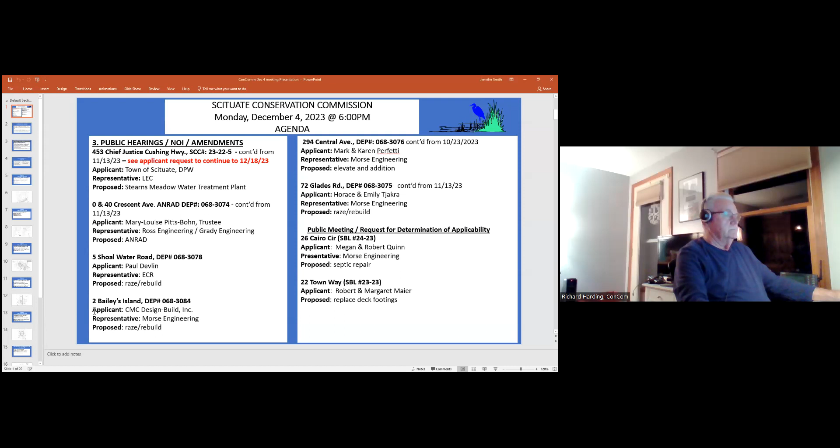Good, Frank. Where'd you go, Frank? I'm here. Oh, okay, all right, you're good to go.

So, do we have everybody in, Jen? 1, 2, 3, yeah we do. We have 5. Oh, unless Jen, I haven't seen Jen Foley. She's not here tonight. Okay. And Andrew isn't, right? Correct. Yeah, all right.

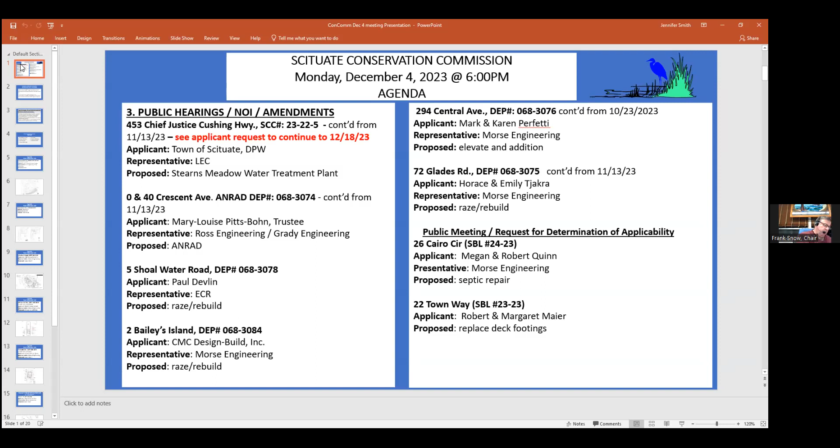Excuse me, so the first one we have is 453 Chief Justice Cushing Highway. That was continued. We have someone from LEC on. We have a request to continue that to December 18th, Frank. I'll make a motion to that effect. That's a motion, I'll second it. Second from Penny. All in favor? Doug, yes. Brendan, yes. Frank, yes, thank you.

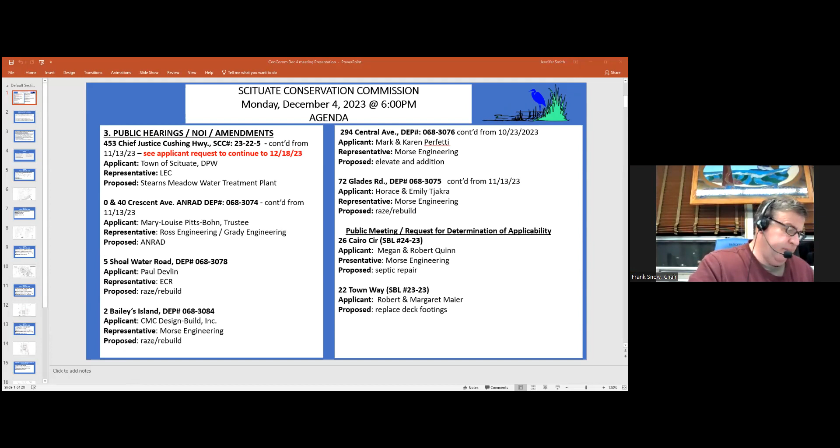It goes somewhere else. Okay, 0 and 40 Crescent Ave ANRAD. And we have Ross Engineering, Grady Engineering, and I think Attorney DeLisi. Hi, members of the board. Can you hear me? Jeff DeLisi. Yes, Jeff. Great. Hi, Jeff. I also unmuted iPad, which I think is Paul Mirabito. Yeah, this is Paul. Hey, thanks, Paul. Good evening. Good evening.

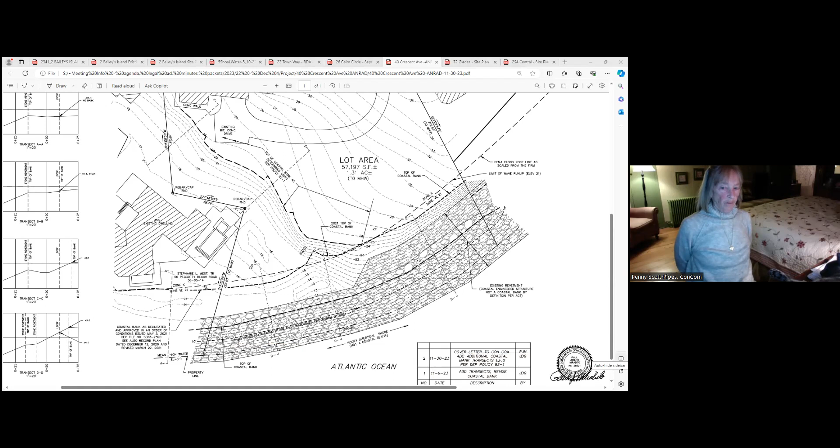I'll do a quick little intro just to let you guys know what we're thinking, then I'll turn it over to Paul. Sounds good. This property is out on Third Cliff at the intersection, basically where Peggotty Beach Road meets Crescent Avenue. The client has obtained zoning relief and a planning board A&R plan was filed to create a lot that has less than 100 feet of frontage and more than 50 feet of frontage. The issue is what we're trying to do now is to delineate the resource area.

So that any potential buyer could make plans to meet the Act, essentially, in any plans that the potential buyer might have. And so the problem here is, and I think I see that Deb Keller is on from Merrill Engineering, the issue that we're all kind of scratching our heads with is that the DEP's CMR defines coastal bank, but does not define top of coastal bank. And so the question is where do you put it?

On this particular property, you can see on Grady Engineering's plan that there's a significant amount of a coastal engineering structure, a revetment, a stone revetment, that is basically what everyone knows as the seawall. And that is essentially taken the place as the coastal bank. But because there is no definition of top of coastal bank, the CZM manual, which is not a part of the CMR, requires or provides guidance that you would follow a slope, which I think is contour number 23, in determining where that coastal bank is.

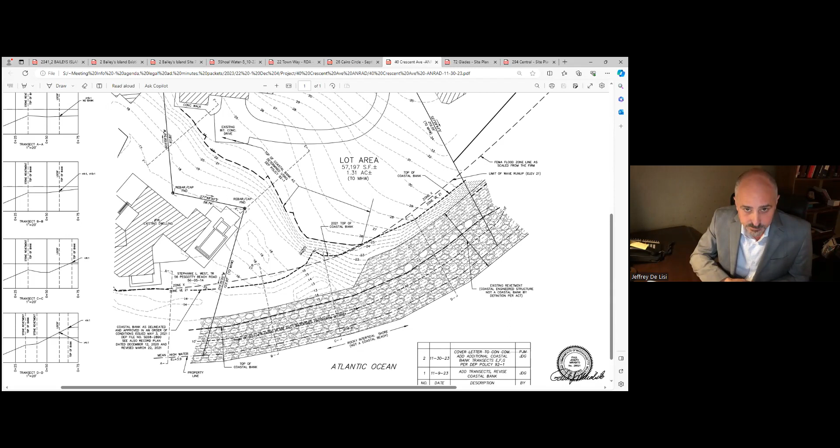Well, it seems like if that's the case, then that decision would probably be better made at the state level, Frank, since this is not really a local matter, in my opinion, because you're talking about state resource areas.

But you have to make a determination before it even gets there, right? Yeah. Right, so the plan would be inaccurate, is what I would say. Well, I guess I'm a little confused when you say the plan's inaccurate. I mean, we just heard from both the engineer and from Deb, from peer review, that they've looked at this.

I'm going to jump in just a little bit—I'll get it back to members, but I just want to get it a little tuned in. So if we look at that, was it example 5? Yes, figure 5.

In reviewing that, you see there's just a thought that coastal bank could be at elevation 21, right? But then these things have always puzzled me because I've heard so many different conflicting pieces. You would kind of look at this and logic would tell you that top of coastal bank would be more at the top of the revetment, or where that slope changes and that VE zone kicks in.

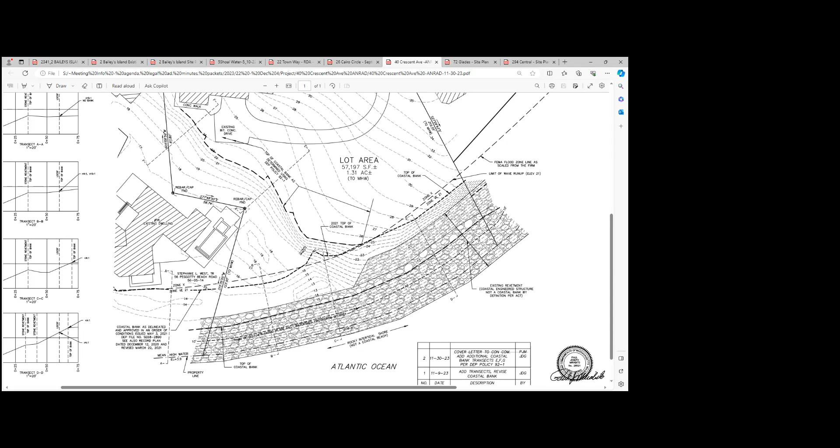Frank, if I can add to something Jeff brought up—if you look at the line that was approved under the order of conditions for number 56, I believe, if they're using the same thinking I'm using, as well as what Jeff opined about where the top of the coastal bank should be, which is on the revetment, that line of 56 is just below the velocity zone line that is scaled from the FEMA map, and that's what was approved by the commission.

If you look at the land behind that line, it actually drops down to like elevation 18 and 19, which is lower than 21. But again, the commission took the top of the coastal bank where it's shown on my plan. What I did was copy it, and I've noted that on the plan as well.

That coastal bank line was also peer reviewed by Bob Gray from Sabatia, and Stan Humphries also chimed in on it for the applicant. Okay, so again, the other thing I'll point out is in the ANRAD packet there's an untitled map, which is in color. It's from Google Earth, and it shows the revetment, and the lower portion of it is a darker color, which I believe is the mean high water line, which is also the property line of the lot.

That's pretty much where the water level is on a day-to-day basis. But again, FEMA's mapped it for storm purposes to be up at elevation 21. I believe the revetment was built in the location, both horizontally and vertically, to protect the base of that cliff so it wouldn't fall into the ocean. And that's why they've picked elevation 21. The top of the revetment is actually up around elevation 22 or 23.

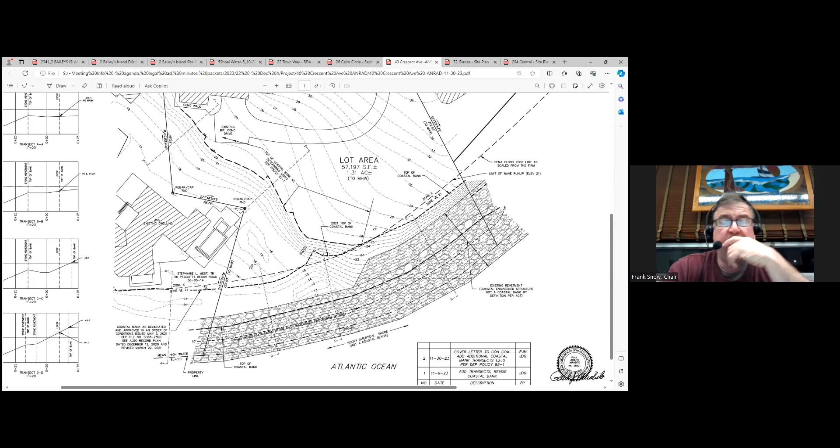And so that's where I think we're now coming to play and looking at it and going, per the policy, there looks to be a second coastal bank, which is more landward than the one that was previously approved. And we've certainly gotten into that before as well.

I'm going to dish this out to members first, and then it will circle around again. And I just think the best person to field that one is Doug. Lucky Doug. He's jumping at it, Frank. Yeah, he's all excited. Well, these do get complicated.

They're always very troubling when you're following contours and they jump up the slope because of the change in slope, and you get this really jagged, funky looking flood zone, and you're like, water doesn't really behave that way. But when you're technically following the determination that's spelled out, you do end up with that sometimes. Which always seems like, well, there should be some better way to determine that, but we've seen a lot of those submitted to the commission.

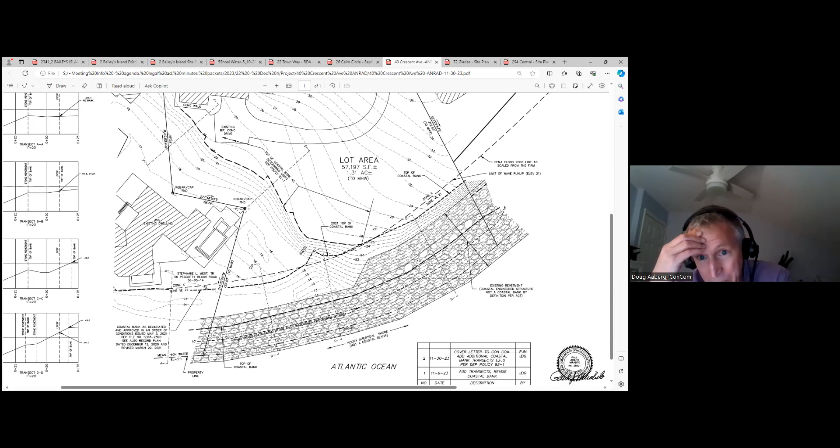Where you have a line that's going along and it looks continuous and it makes sense, like this following the top of the embankment, that all makes sense. And then all of a sudden, when the slopes change, it diverts and goes somewhere else.

I'm going to be looking for a way in. I mean, I can see why this plan, I guess, is accurate because it shows two different flood zones. They would like to hold the one lower, for obvious reasons - it's far less restrictive if you hold that upper one. It's too bad that in 56, that one was submitted without, like Paul suggested, the other topography on there. So if you look at that in an isolated view, it makes sense.

And it's following what the FEMA map shows as a flood zone. But if you're following the slopes, it moves more inward, and it does seem like a conflicting determination.

But Deb made the statement that she believes there would be wave action up there, for 56. Can we get Deb to just quantify that a little bit, like where you thought that was? Where I'm coming from is going back to - and it really doesn't have to do with the definition of coastal bank, but it's the reading of how to interpret where that limit between the VE zone and the zone X ends up.

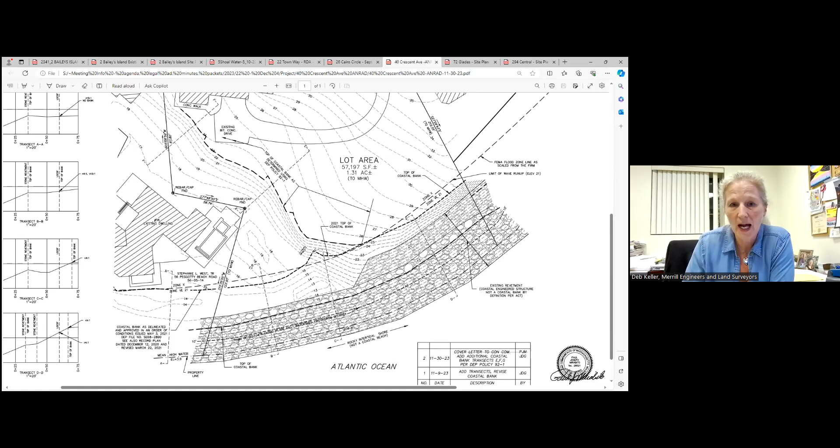You start looking at that slope here, because you're saying I have flooding all the way up in between those two homes. It's going to flood out 56 Peggotty Beach. And now I'm looking at the slope and using policy 92-1 to determine where that top of bank is from that flood zone.

That's how I'm sort of looking at it, saying through the DEP policy, it looks to me like a second coastal bank. But I have to agree that the definition of coastal bank makes it hard to coincide the two and really make them work hand in hand.

Thank you. Yeah, the two definitions are at odds, and my point is that the definition of coastal bank is that it has to be the seaward face or the seaward side of any landform other than a coastal dune. And so here you have this structure, which is the landform.

And I understand what Deb is saying, because she's looking at the FEMA line, which is not necessarily adopted as part of the decision on the definition of coastal bank. But I think the commission needs to look at, is this a coastal bank? Not whether this is in the flood zone.

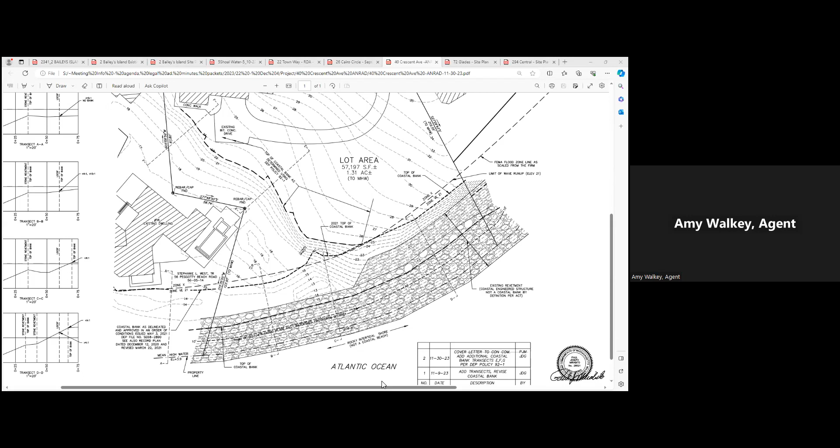It just, is it a coastal bank? Right. Which sounds to me, when we look at things like that, we're following strictly by the language, the policy, and the slope. Yeah, and if that's the case, we have a review consultant who has indicated that it should be up to the top, the upper line there.

Let somebody else. Okay, we'll circle around this, but we can't be at this all night either. Can I ask one more question before I move it on?

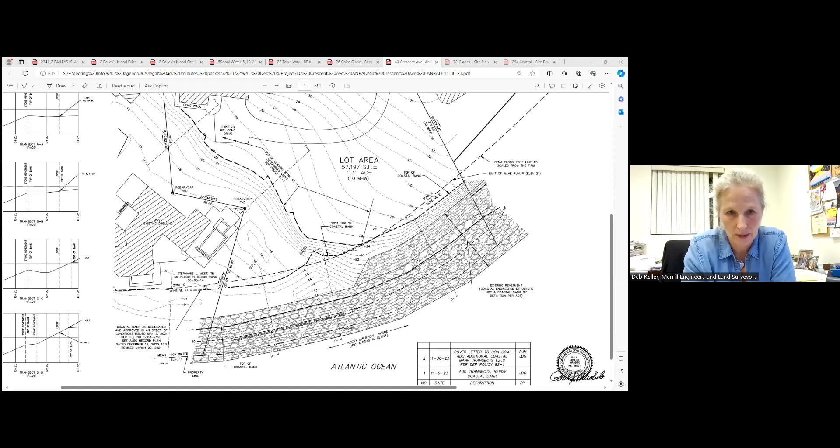Is there a way to designate like a first and second coastal bank when we have multiple ones? I don't know if policy 92-1 signifies that. But I do think you can definitely have multiple coastal banks on a property. That's indicated in both the coastal bank definition as well as the policy. I don't know if they tell you how you're supposed to designate it, but I've seen it as Coastal Bank 1 and Coastal Bank 2, just to indicate on the property that there's more than one coastal bank.

Okay, thank you. Frank, we show one on the revetment on the left side. It says top of coastal bank. The riprap comes up a ways and then it flattens out and then continues to slope up again. It's on the left-hand side, and it says top of coastal bank on the revetment.

Got it, yeah, I see one. And then the other one would be the one that was approved by the commission for number 56. And the third one would be the one that I and Deb laid out last week, which says top of coastal bank is determined by DEP policy 92-1, which does not reference anything about coastal engineering structures. It presupposes that there is none. That's the flaw in using that policy in this circumstance.

Paul, just briefly, on 56 Peggotty Beach Road, where was the line? If you were to draw the line that was established by the commission all the way through this property, would it be the Zone X VE line? Is that it? It's the line we show on the plan as the coastal bank delineated and approved in the order of conditions issued on May 3rd of 2021. That line is shown on our plan. There's a small bump up and then it continues over to the right side of number 40, just below the FEMA flood zone line. And that's what you're asking here.

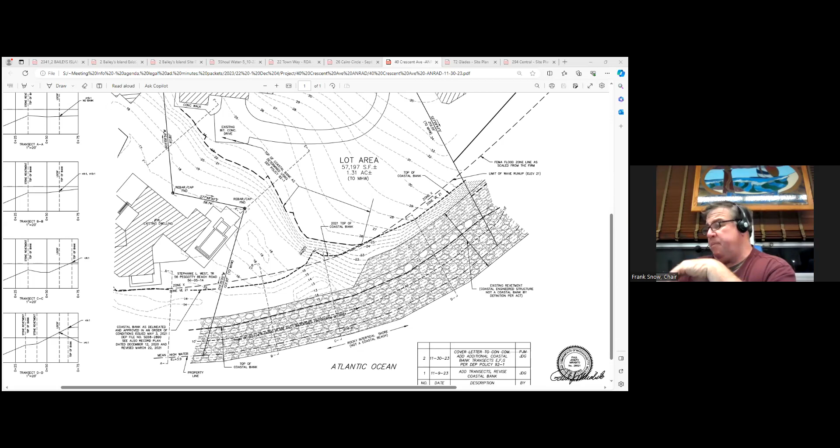Richard, I'm in no man's land. I can understand Penny's concern, and this is certainly not my strong point. I see the inconsistency on the one hand, between

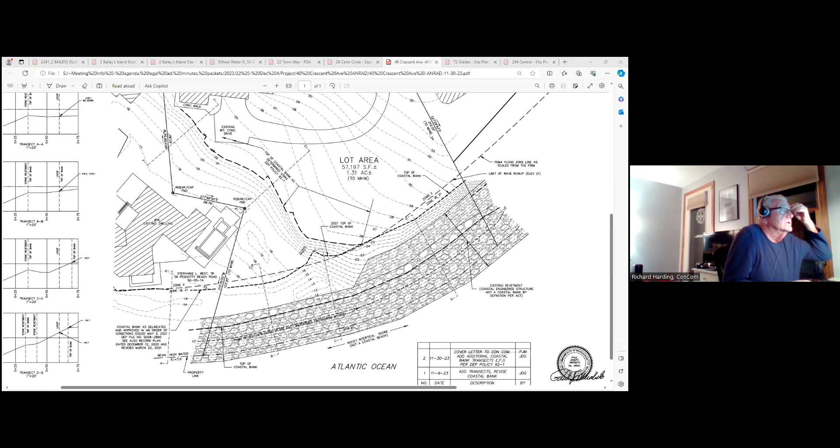the VE 21 on the one hand, it goes across slightly lower between where it comes up to VE 21 and Zone X meet. It just, to me, I wish it was just Zone X and the line went straight up that way. It would be, to me, a little more easy to figure out. I don't know what to say.

I honestly don't. The one thing that keeps striking me is all of these things are set up for a 100-year storm. So if you don't have a storm in 100 years, but then you have two within 200 years, it's just incredibly complicated to me. I'm sorry, I'm not being much help here, except that I do agree there should be some consistency, and I don't see it happening.

Brendan, thank you, Richard. Are you glad you live in the West End? I am. Yeah, I have no coastal bank. Not yet. No coastal bank here yet. But someday.

Yeah, this is very confusing as to which one is the one that should be. I don't have very much more to add than that.

Because, Frank, yes, Penny, my problem is this is an ANRAD. So of course they want as much land as they possibly can for somebody to build on the ocean side here of the Pitts house. So I can understand that, but once we stamp it, it's done, the ANRAD. And I just don't want to make a huge mistake and get in trouble with another project down the road.

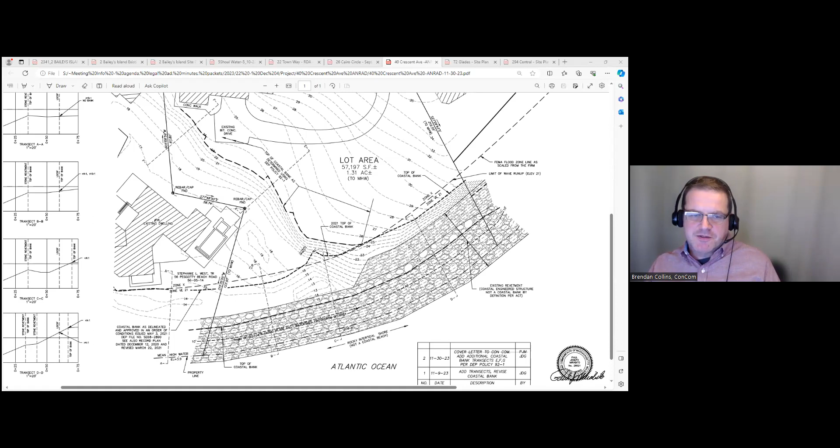I am hesitant to accept this as the fact, just because there's also a top of coastal bank that's part of the revetment, and I haven't found anything in my research that says that engineered structures could be top of coastal bank. It's funny, Brendan, when I first got on, that was like everybody just pegged the top of a structure as coastal bank, and then they revisited all that, and then they've changed it to this type of thing. But

So I guess the question would be, can we accept this plan showing multiple coastal banks? I mean, is one being shown right near the elevation 21, the VE Zone X, right? We have one coastal bank shown there, and then we have another one coming in up on the top of that slope.

Yeah, Amy, if you gave this plan to someone like Greg DeCesar, what would, how would they weigh in?

I think it's a little bit confusing, to say the least.

Well, the plan is drafted in order to make an argument to hold that lower line consistent with the statements of not a coastal bank, rock, in the revetment. So even though it calls out top of coastal bank more than once, there is ambiguity in the plan itself.

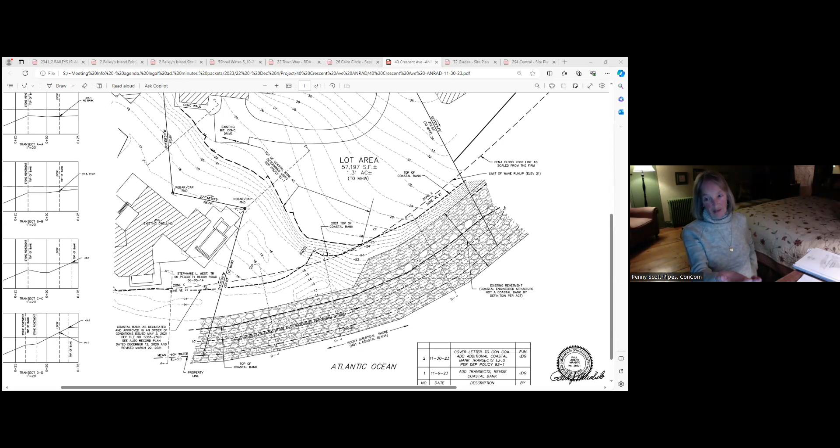Okay, Jeff, what you hear is that in the corner, showing that line at the VE zone, coastal bank is delineated and approved in an order of conditions of May 3rd, '21. Well, why is that not true?

It is true, I'm not saying it isn't. So what we're trying to figure out in this plan is, we're going to say that everything on this is in accordance with the information we have.

So we know that line—did that line actually get accepted all the way up to the other end of this property, or did it? Yes, it did, Frank. On the Pitts property? This is the Pitts property. No, I know this is the Pitts, but my question is this: the line that's shown here, the arrow points to it, and it says that's the coastal bank that was delineated and approved.

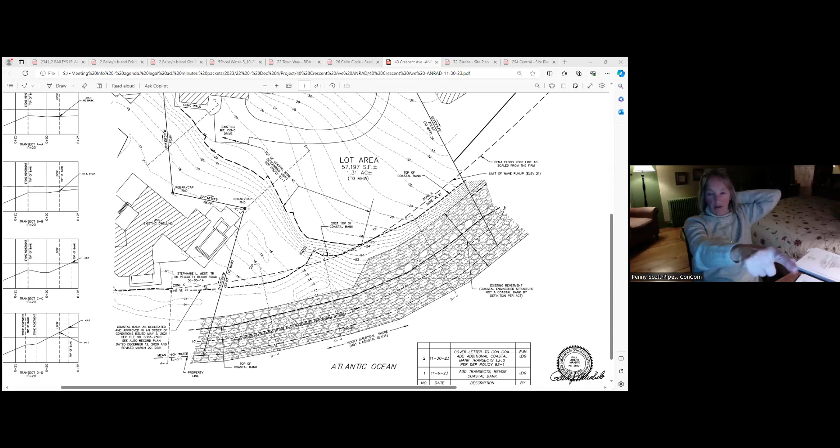And it's pointing to a line there, but on the plan that was approved in '21, did that line actually get drawn along this whole area, this piece of property that we're seeing now? Or did it stop at that property line, or somewhere right around there?

No, it kept going under number 40, because one of the transects that the peer review engineer was asked to do was actually on the land at number 40. I've got the site plan here from Morse. Go ahead, Deb. I'm looking at the Morse plan.

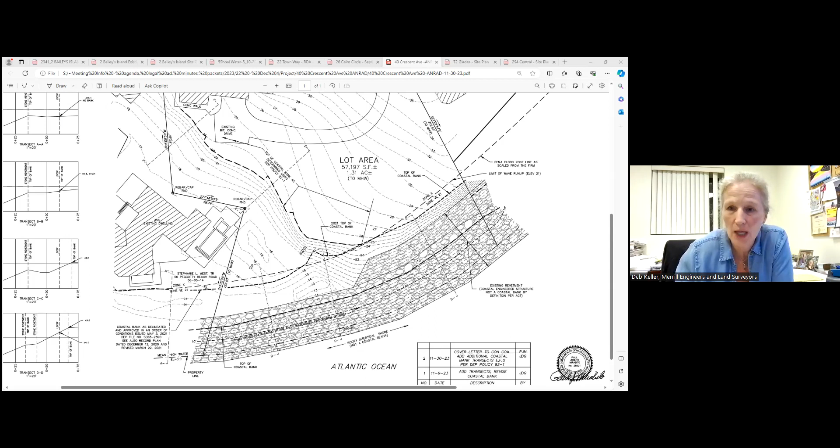That transect C is where they stop, right where you see the little point in that coastal bank zone coming. That transect C is where they stopped, and they limited their topography to that point, so they don't have any other topography on 40 Crescent that they're interpreting. Oh, okay, I see what you're saying. So that's why you've got the funky little divot there. Got it.

Okay. So back to my question, Amy—could we get someone from DEP to weigh in on this before we make a decision?

Well, first of all, we've already had CZM give us comments. I'm not asking for somebody from DEP already, but DEP—if this is a possible appeal case, they're not gonna come in on this one again. I think they've issued the file number as well, Frank, for the ANRAD with no comments.

Interesting, well, I think that they just crank them out. Well, that's not surprising—this is an ANRAD. Right, you know what I mean? So that's not surprising at all.

I think this could go a couple of ways. One, the applicant could modify this plan so that it puts you in a position where you could accept it because it's easier to agree with, you know, you're more comfortable with it. Or you close it tonight and say you don't agree with everything on the plan, and then maybe they don't agree with that and take it to DEP.

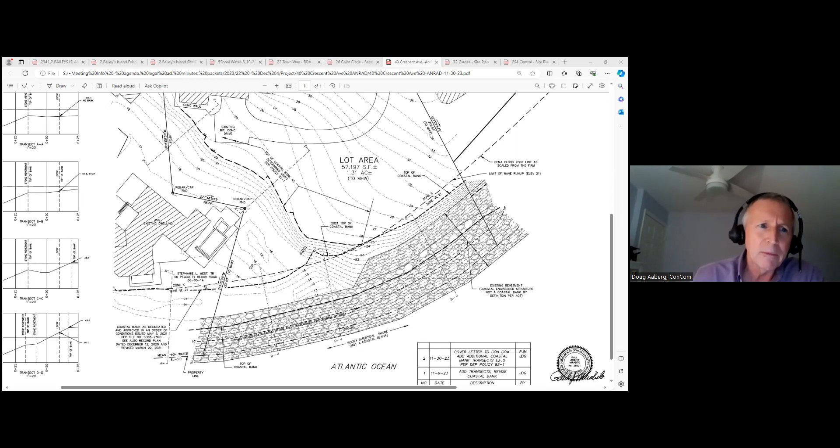Correct. So get us a new letter that they accepted. I'm only worried about you guys, not us. That's all. Let me see if I can.

I think what I want is just accept the plan and then say that you don't agree to that, you know what I mean? But I'm not so sure I would do that.

Can people hear me? Yep. Okay, the alternative might be to continue this.

And in the interim, maybe apply for a notice of intent based on certain assumptions for a disturbed area, and indicate that we don't believe the upper line is valid, but we're showing it and nonetheless requesting a variance because we don't think there would be any adverse impact. Frankly, the whole reason we applied for an ANRAD was because a buyer can't assume the commission would find no adverse impact and grant a variance to the upper line.

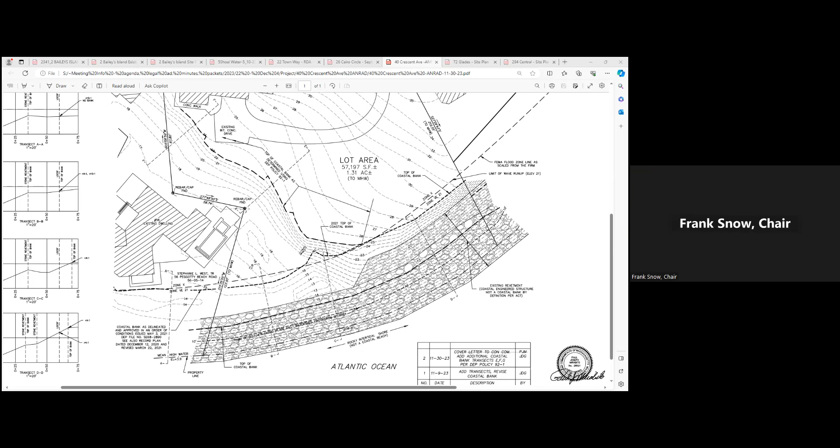Okay. So this could be a true plan if the top of coastal bank line from that transect C, that tip of that point, to where the line changes, if that were just eliminated right there, wouldn't this be an accurate plan?

Less the letter, I see what you're saying. Just the plan. You'd be showing what you would consider as the most landward coastal bank, right, and then you're not going against what was already approved for the abutting property. So you'd be showing the same line there.

Okay, Frank, is your question limited to just the point of transect C, or are you going beyond transect C to the right of it? I think that there's a section of that line that could not be on the plan if we were to accept this, from C to where the A is at 56.

It's right next to elevation 24, 25, 26. That line, to me, is not a line that would have shown up before. You just can't extrapolate that line out further than where it ended on Morse's plan.

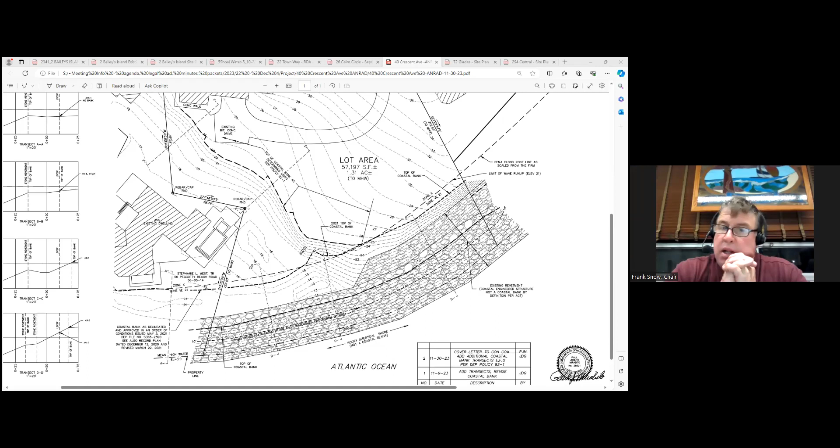No. We're showing it because we were asked to show it, because that's what the policy says. Okay, but our determination of the definition and what we've asked the commission hasn't changed. And that is that it is essentially the zone VE, zone X line, which follows the contour of the top of the coastal engineered structure. Right, it's consistent, we think, with other determinations by the commission, and makes rational sense.

I'm not disagreeing with you, Jeff. I'm just... I know, but I want you to be clear that the area that we're saying, to Doug's point, as determined using DEP policy 92.1, is shown because we recognize that's what DEP policy says. We don't think that's the line, in light of the fact that there is a structure here, and that policy doesn't take into account that there would ever be a structure. It thinks that the bank, that contour, that's the top of that slope, is essentially the landform that feeds the beach and acts as a vertical buffer. In this case, it doesn't. And that's why we disagree.

And it's because there's a structure, and the DEP policy doesn't even take into account that there would ever be a structure in its place. So what we're asking the commission is to determine the zone X, zone VE21 line all the way across the property as the delineation of the top of the bank. And if it's not inclined to do that because of the policy and Deb's very wise advice to the commission, then I would request a continuance at that point to confer with my client and maybe just file an NOI and tackle it from that perspective.

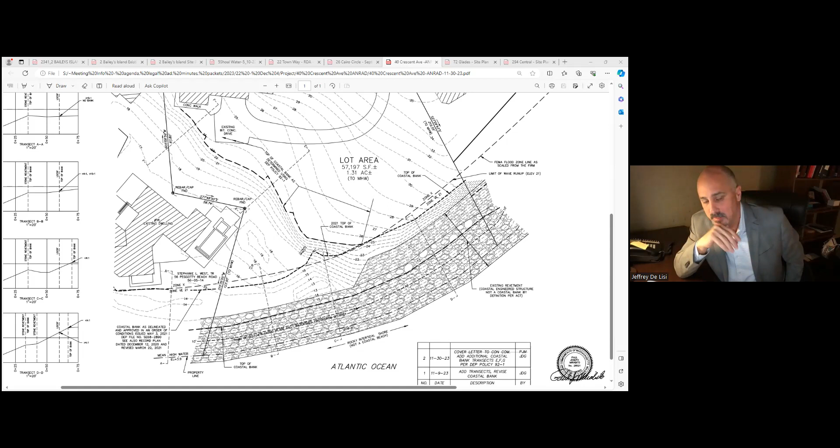I'd rather vote on a continuance. Okay, smart. How much time? Who said smart?

I'm only going to request a 2-week continuance, but I'll probably know in a matter of days where I'm going with that, and I'll write to the board. Okay, so what's the 18th?

Can we do this on the 18th? As long as it doesn't take this much time again. We can. Okay, well then, yes, we'll go January. I don't want to argue about the date.

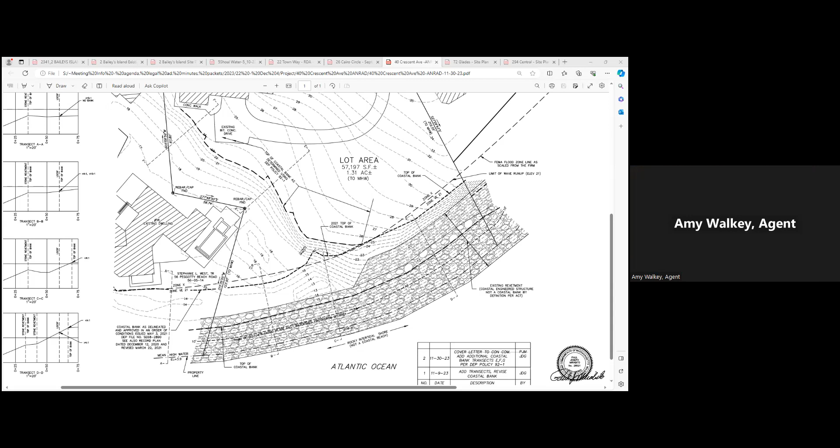What's the next available time, Jen? The 4th. Wait a minute, January 8th? Not the 4th. No, it wouldn't be the 4th, it would be the 8th. You're right, okay.

January 8th, and we won't rehash all this, so long as you guys promise to remember it. Oh yes, I'll never forget tonight. How about Deb, does that work for you? January 8th sounds fine with me. Good.

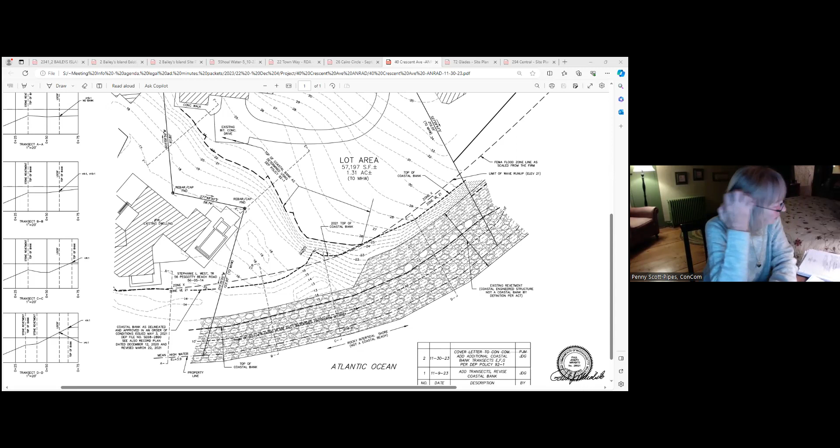Well, you don't want to meet on New Year's? All right, so we have a motion. I make a motion we continue 40 Crescent until January 8th, 2024. A second, I'll second that.

Second from Brendan. All in favor? Richard, yes. Doug, yes. And Frank, yes. Well, that was... goodness, we started with an easy one. Yeah, thank you very much. Thank you, thank you, it's been fun.

5 Shoalwater, that's raise and rebuild. On December 4th, 2023 at 6 p.m., the Scituate Conservation Commission will hold a wetlands hearing under Chapter 131, Section 40 of the Massachusetts General Laws and Section 30700 Town of Scituate Code of Bylaws regarding the application of Paul Devlin Jr. for work related to raising and reconstructing a single-family dwelling at location 5 Shoalwater, Scituate. Abutters and other interested parties are invited to attend. Information to access the virtual meeting will be available on the agenda posted on the town website.

Cameron Larson from ECR is on the line. Yes, thanks Amy, thanks Commission. This is Cameron Larson with Environmental Consulting and Restoration, and I'd be happy to proceed with the presentation if the Commission's ready. We're ready. Excellent. I can assure you I can keep this one quick for you. You'll get points for that.

Good, so this is a notice of intent we've submitted on behalf of the property owner and applicant Paul Devlin Jr. It's a residential property with an existing single-family home, existing paved driveway, deck to the rear, surrounded by typical landscaping and maintained lawn. Off to the east of the site is Musquashcut Pond and associated BVW that was delineated by ECR, shown on the plan. That buffer zone does extend over the site and into our work area. The site also contains land subject to coastal storm flowage within the work area as well.

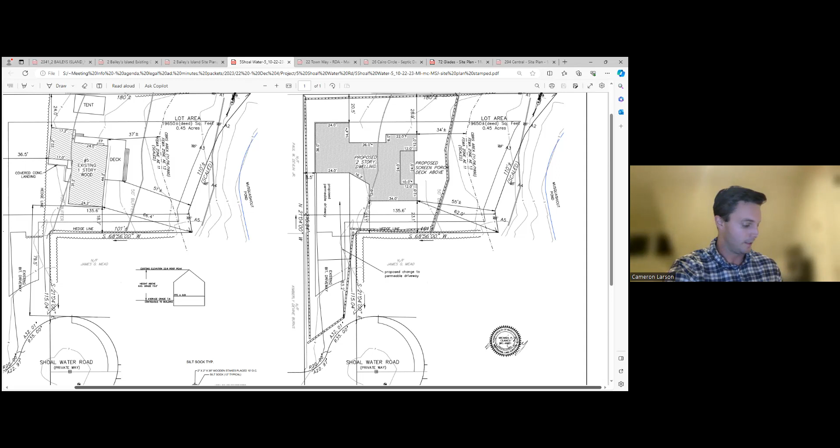And the difference in the size of the house from current to new? That I don't have an exact number. That's included in the impervious calculation. So that jump from 3276 to 4038 includes the increase of driveway and house, all in one number.

I agree with Amy, we need some mitigation here, but that's fine. I appreciate it, thank you.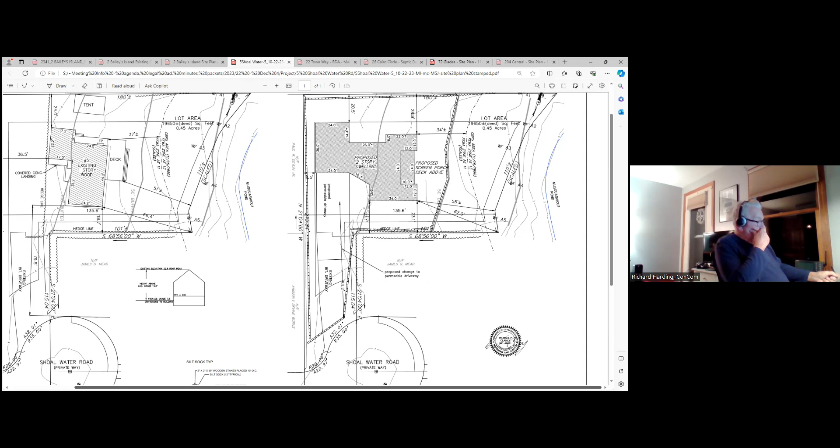Good, Frank. Brendan? Yeah, I'd like to see some mitigation along the pond as well. I guess that's all I really am gonna say about this right now. Okay, thanks.

Penny? They don't like Phragmites, Frank? Huh, they want fancy mitigation? No, I have nothing, but the frag will grow there very nicely.

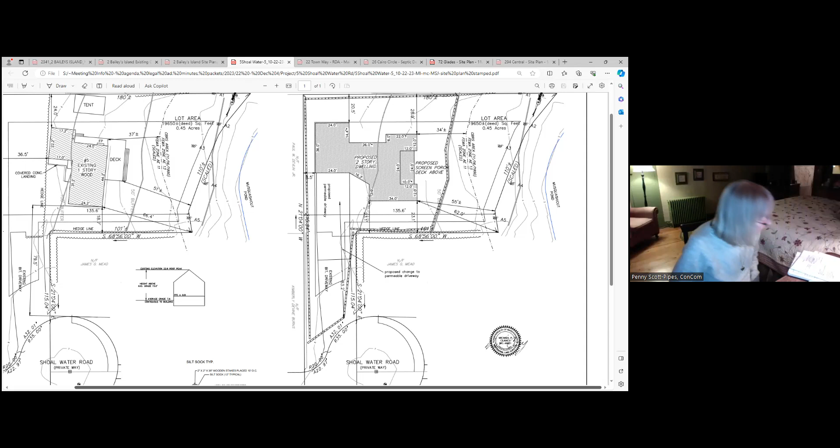Doug? Come on, Doug. No, I agree with what's been said. I think a little mitigation will be fine. And everything's gonna be built in accordance with FEMA regs, so. Yep, yeah, no, I'm good.

Do we have anybody in the audience for this one? Saying none. Okay.

So I think Amy's point is good. Maybe a combination of either Phragmite eradication and some mitigation. I don't know, if you want to talk with... I think most of the Phragmites are actually off-site. You can see the BVW kind of follows off-site, so I don't think we're going to be proposing any work off-site for Phragmite removal.

And again, I just want to stress, we are moving the structure further from the resource area. We're elevating it above the flood zone. These are all vast improvements. I don't have the square footage of actual structure in the buffer zone. We could calculate that, but if it's an increase, it's a very small increase, and I'd venture to say maybe even a decrease possibly. I'm not familiar with any policy in town that requires specific mitigation.

If you're looking for 1-to-1 for square footage, I would just need some direction. I'm not familiar with that, so typically what we might look for on these properties, I'm looking at the distances from the property line. On one corner, the distance to the property line is 66, the new one is 62. So that's really like 4 foot closer. And on the other side, the distance from the new proposed was 37 in the existing, and it's down to 34, but there's no deck in front of the property anymore. So it's pretty much as close, or maybe a little closer.

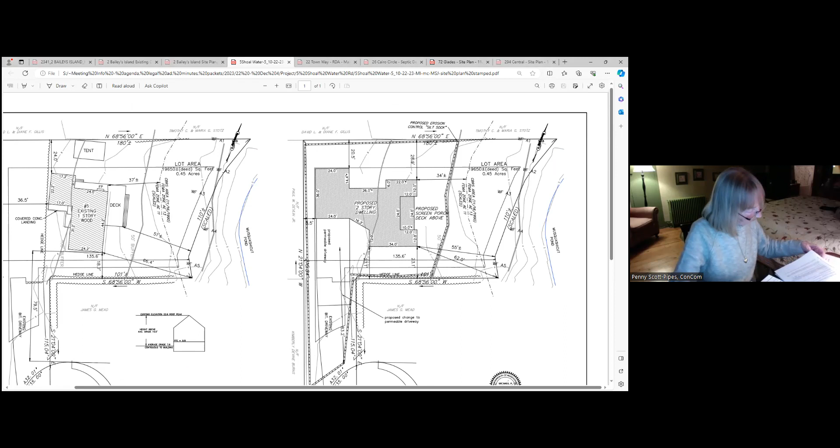So just looking for some habitat improvements, for the bunnies to run in. Well, the bunnies will find their way anyways. Oh, you're a poopy. It's a Doug new word.

Richard, anybody? I think 6 to 8, I think 6 feet's fine, actually. But I think there does need to be something, and yes, it's an overall improvement, but there are still some changes being made that we're willing to allow. In the grand scheme of things it's a little different, but overall an improvement, no question. You're intensifying the use within the 100-foot buffer, so you're asking them to improve the native conditions around Musquashcut, which is consistently what you ask for in other new builds.

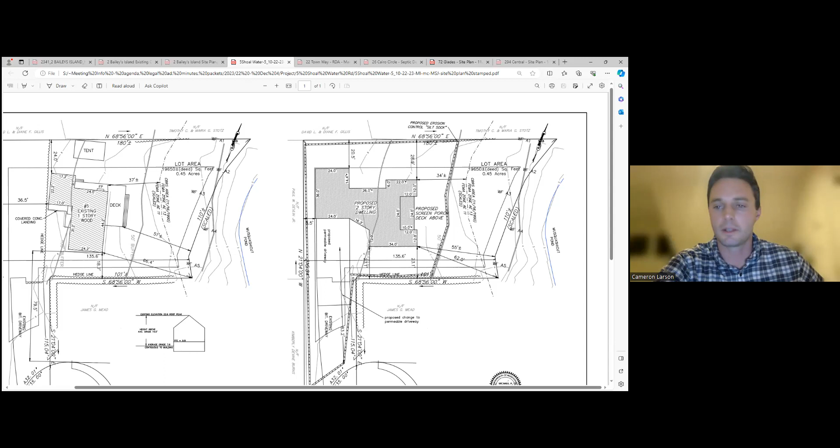Okay, Cameron? Yep, no problem, we can put together a 6-foot planting buffer along the BVW line there. Yeah, definitely give me some good native vegetation, blueberry bushes. If we close it, we'll need a plan. Amy will need a plan in the office of what it's going to be. We can pull that together. If you want to condition it, we'll pull together that planting plan and get it over to you as soon as possible.

Can I add one more little thing? Your commission members are going to think I'm being picky, but I looked all over this and don't see a benchmark or a vertical datum on the plan anywhere. I could be missing it, but because it's in a flood zone, it'd be nice to have a datum reference so you can easily relate between the FEMA flood zones and the elevations shown on the plan. I'm sure your surveyor has one, but just add that through a note. Sure, we can add a note on the plan to that.

Make a motion to close, that's from Richard. Do we have a second? Second, from Penny. All in favor? Doug, yes. Brendan, yes. Frank, yes. Great, thank you, Cameron, very excellent. Thank you very much. Have a good night, you too.

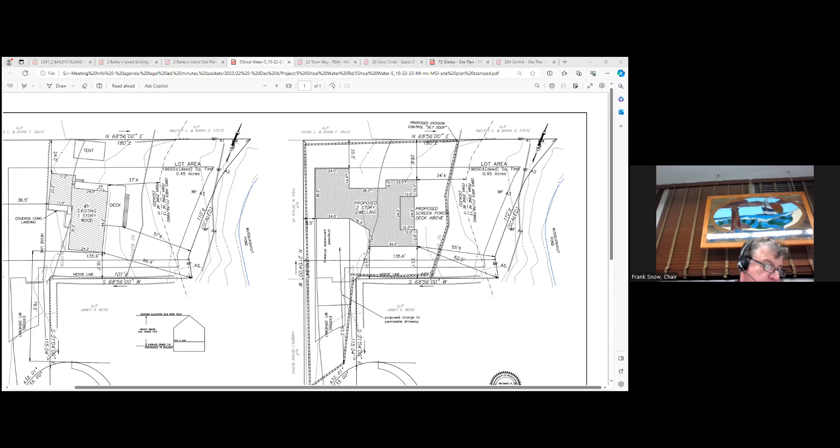Someone from Morse Engineering. I think you're going to open this one, Frank. On December 4th, 2023 at 6 p.m., the Scituate Conservation Commission will hold a wetlands hearing under Chapter 131, Section 40 of Massachusetts General Laws and Section 30700 Town of Scituate Code of Bylaws and Section 32050 Town of Scituate Stormwater Bylaw regarding the application of CMC Design Build, Inc. for work related to raising and reconstructing a single-family dwelling at 2 Bailey's Island, Scituate. Abutters and other interested parties are invited to attend. Information and access to the virtual meeting is available on the agenda posted on the town website.

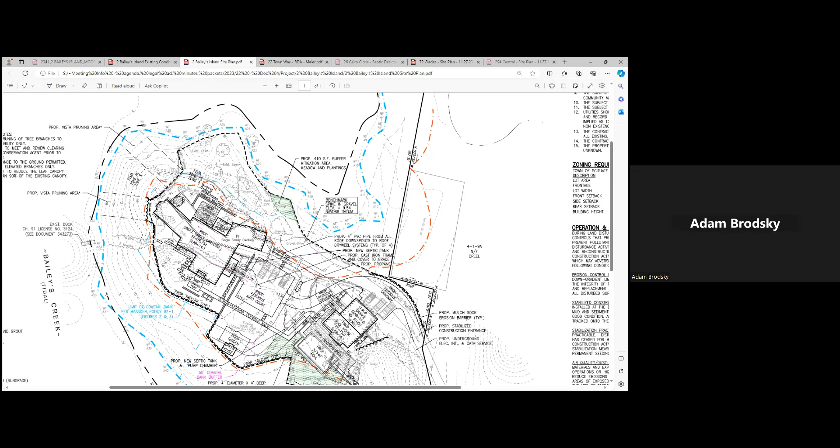Good evening, Chair Snow, it's Adam Brodsky, can you hear me? Good, with your permission I'd just like to make a quick introduction and then hand the presentation off to Jeff. Good evening everyone, my name is Adam Brodsky, I'm a local environmental and land use lawyer, and I represent Mark Moore and Jackie McClennon, who are the property owners. As you know, Jeff Hassett is our professional engineer, Sean Papich our landscape architect, and Brad Holmes is our professional wetland scientist, but is not available this evening. Very briefly, this is a previously developed lot.

We're proposing to raise and reconstruct the existing single-family dwelling, garage, and accessory structures. The relevant resource areas are buffer zone to salt marsh and buffer zone to coastal bank, and the property is located within the land subject to coastal storm flowage. AE elevation 14 is the FEMA flood zone.

We've done our best to locate all of the new work outside of the 50-foot buffer zone to the salt marsh, which is the most sensitive wetland resource area, except for a small portion of the proposed pool. We are doing work within the 50-foot buffer zone to the top of coastal bank. This is not a typical coastal bank — it's fundamentally a ledge outcrop that does not contribute sediment to the coastal beach. Nevertheless, it is a coastal bank.

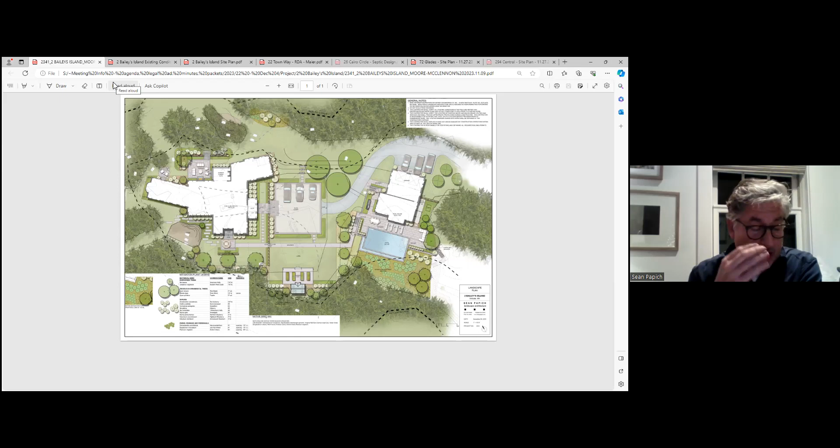Well, what Jeff was describing, we put a representative plant list on there. We'll get down into more detail in terms of quantity, but the square footage, as he described, about 2,900 square feet in the area where we are removing the sheds and the bulk of the garage, they're there now, some of that deck, all with native plant material, as well as seeded in with native seed mix, warm season grass mix.

The other piece, shaded in that olive color just on the south side of the pool that you see there. On the north side, you see the 410 square feet up north of the proposed house, and the existing house also, of course.

We would always have some amount of vegetation, woody vegetation, but also seeding in the native seed mix to get full coverage. Also establish some ferns, some native grasses and native forbs, either in pots, small pots, containers, or also plugs. We've gone to using those also.

Jeff really described most of the features at this point. You also see quite a bit of vegetation up against the house. We're not really considering those to be mitigation plantings, but most properties that we're working on, we're also doing a substantial amount of planting in and around the use areas, as well as right up against the house.

But I would say the representative plant list that's there, take a look at that. That has all the usual suspects. That pretty much covers it, I don't want to get too heavy into it. All right, we'll wait for some questions from you.

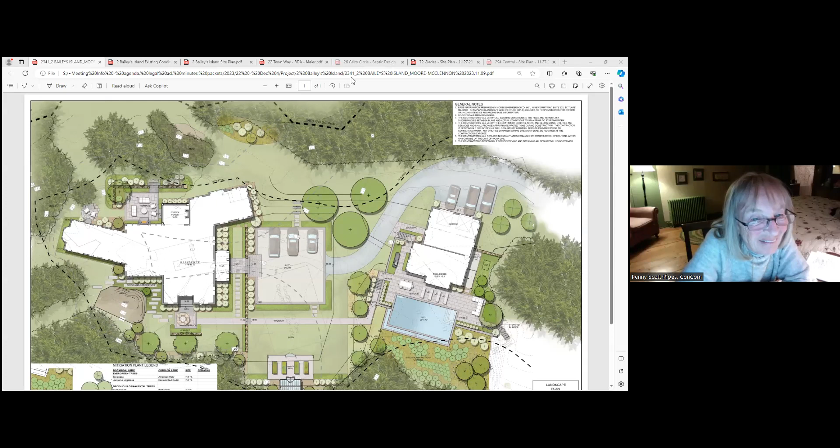Okay, now I see the numbers, thank you. You bet, thank you. Do you have anybody else on your team who wants to speak? Chairman, so that is the presentation at this time, but we're happy to answer any questions. Thank you, Adam.

Amy, you went out there with Art, do you want to start? Sure, yeah, so...

The team here just gave an overview of this property, the notice of intent for this site, which you have 2 peer reviewers for. You've got Ecotech, who we were out there with last week, and who provided a nice memo. There were quite a few flags missing, and revisions were made, so expect the lines to be changing. Also, stormwater peer review is underway by a peer review engineer as well.

So neither of those peer reviewers are on the call tonight, as those reviews are in process. I didn't think they needed to be on tonight, but expect revisions to the plans. As you can see, this is a fairly significant project, and it's important to start the information collecting process. I think probably a site visit would be a pretty important milestone to undertake on this particular piece of property, and obviously we want to confirm the accuracy of the resource areas, and then just evaluate the project and figure out the best project you can get out there.

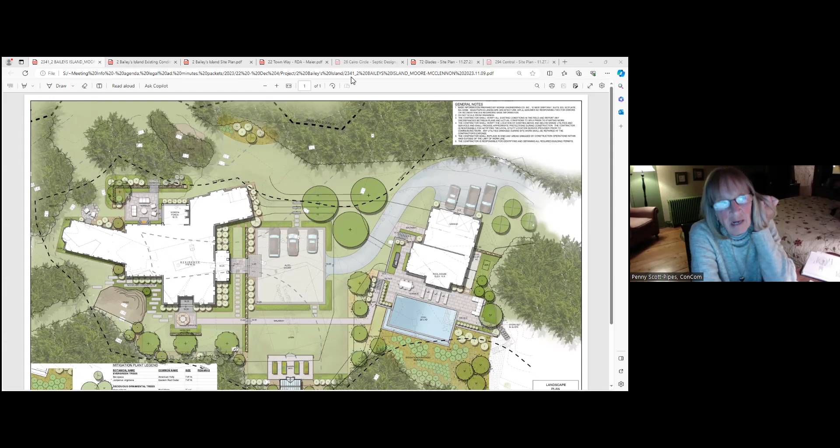Penny, you want to start this one? No, I would love to go out there, and it looks absolutely gorgeous what you're planning to do. But I'll be interested to see what Art has to say, and the stormwater review that's being done. I don't have any comments at the moment. It looks great, though.

Doug? Well, it's pretty dense. I do have a couple plan questions, Jeff. Looks like you're leaving the existing septic field and re-piping to it for both the pool house and the new house. Yeah, that's correct. The leaching field is going to remain. I don't have the year in front of me that it was installed, but it's relatively a new Title V system. There will be new tanks installed, but the field will remain and it has adequate capacity. So you don't have to build a new thing there. No.

There's, I think, on the south facing side of the house, there's a bunch of rectangles that show up on your plan as well as Sean's, and they're kind of grayed out. Are those anything significant? Are those steps or stepping structures, stones, or in the grass? Yeah, that's stepping stone vegetation. Okay, nothing significant then.

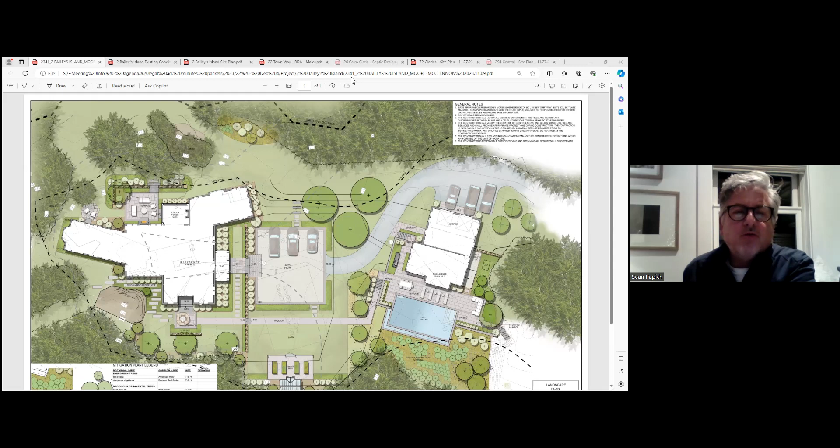There's a narrow walkway you can see coming from the door over toward the pool area. We did keep most of these walkways as stepping stone pathways. Everything is permeable paving in terms of stonework and base prep. Any of our terrace work is intended to be permeable.

And then there is a coastal bank. I see that you have that drawn in blue. It looks like the same kind of thing. It goes along, shoots up the slope and then follows the top. So it's determined by slope. And that's kind of a dash dot blue line, right? That's correct. Yes, and you call it out as limit of coastal bank per 92-1.

Yeah, I don't think, obviously there's a lot of ledge, looks like. So it seems like stormwater will be a bit of a challenge, but I would guess that you'll figure that out. One thing I would note with respect to the ledge is that they're not doing a full basement or even a full crawl space there. It's really a minimal slab or crawl space. So there won't be a lot of ledge removal in the area of the foundation. Oh, okay, that's probably wise. Yeah, I'm good for now.

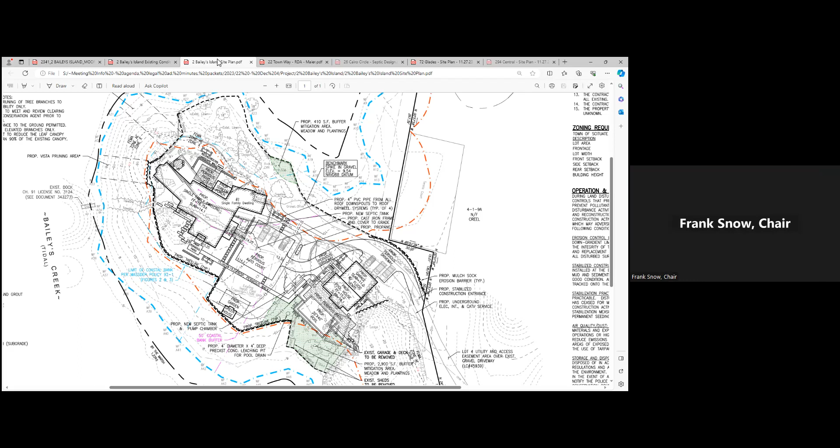Richard? I don't think I have any questions now, especially since we're going to have to continue it anyway, and the peer reviews and the flags are going to be added. So I might have questions later, but right now I don't. It'd be good if any of you go out there, as we finish, just if you have any direction you want to give the applicant. Yeah, but obviously there's going to be more to this, and seeing it might help. Yeah, I'll go up. Okay.

Brendan? Yeah, so like everyone else, this is, I guess, a little bit subject to change. But I'm glad to see sheds and garage moving out of the 50. Not a fan of seeing the pool go in the 50. Glad the driveway is moving out of the 50 as well. Just a question on that - what's going in its place? I saw a few trees - is there lawn underneath that? Yes, there is intended to be lawn areas going in underneath some of those existing trees. Okay, so you're going to put lawn areas where the existing driveway is in the 50. Yeah. Okay.

I guess then, you know what, I'm going to leave it at that. I'm just glad to see things come out of the 50. And the pool though, it's just that corner - very tiny, about a couple handfuls of square feet - that is with 3,300 to 3,400 square feet of mitigation plantings. I think the gentleman on the hearing before us was starting to squirm about a 6 foot wide planting strip someplace. Kind of curious to that. So that's all I'm saying for now - we're pretty dense with our plantings on all of our projects, frankly. That's all. Thank you.

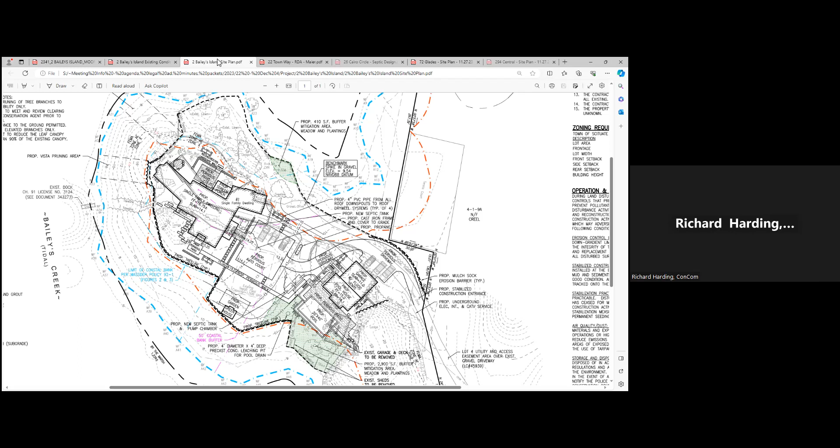Take it, everybody? Yeah, you did. Okay, can I ask one more question? Is there an observed buffer zone to a coastal bank? Is that a resource area that has a buffer zone associated with it? Yes. So that 50-foot buffer zone then would have to be - does that mean that has to be revised to go 50 feet outside the coastal bank? Do you know, do you follow me?

Mr. Aber, do you want us to show on the plan the 50-foot buffer to the coastal bank in addition to the limit of coastal bank? The coastal bank is being shown, but what Doug was asking is whether there's a buffer to the coastal bank shown as well.

It's there, down at the bottom it says 50-foot coastal bank buffer. There's a line that goes through the house and everything - that purple one. Got it, thank you. I was looking at the thick red one, but not that one. So most of that house is inside that 50-foot coastal bank buffer?

Yes. In some cases, that coastal bank buffer is going to be up gradient of the salt marsh, so that's going to be more conservative, you know. Yeah, it certainly is.

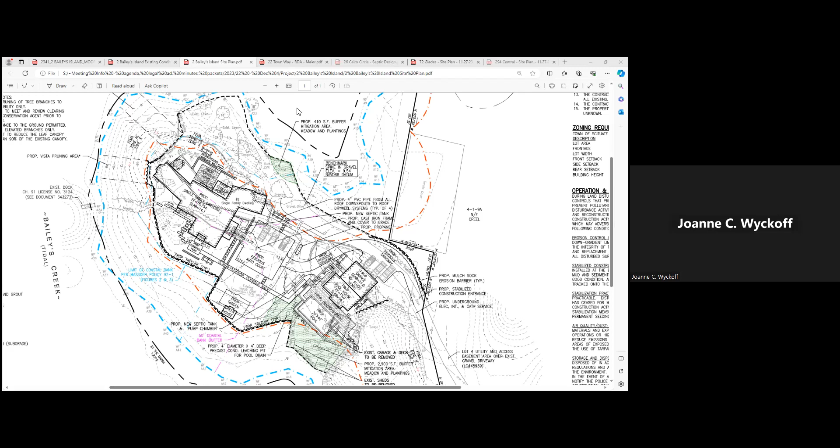Joanne, can you hear me? Yes. Joanne Wyckoff, 154 Turner Road. I'm here as a liaison from the Water Resources Commission. I'm curious, I think I remember you saying you've got a dry well system, but I'm wondering if you've got any kind of water catchment system for watering all your foliage and plants. No, we're not specifying any collection system for water to be reused. The dry wells for the roof runoff are intended to promote recharge. But that's certainly something we can look into before the next submittal. That'd be great. Thank you.

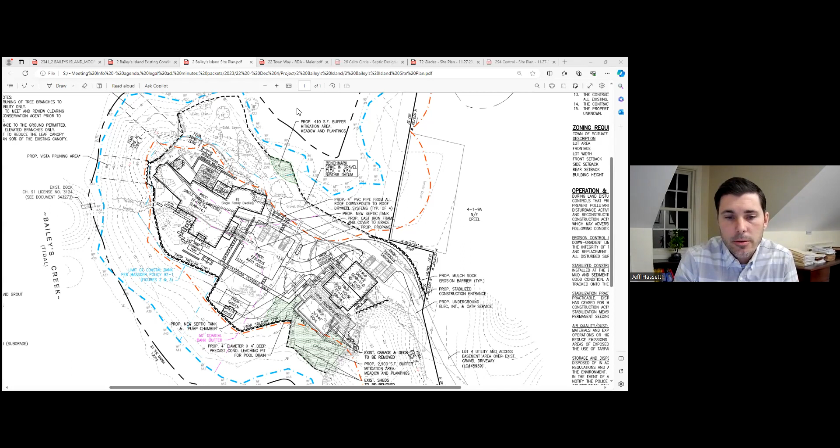So that 50-foot buffer essentially remains untouched. The majority of the work is within areas that are existing lawn, landscaped, and developed. The intent is to definitely give the feeling of a very natural landscape. I know you see some squareness to the auto court and some of the walkways, but the intent is

to make this feel as native as possible. There's certainly a reduction even in some of the lawn areas. I think all that area inside the 50-foot buffer where the sheds and existing garage are, there's quite a bit of lawn, and that's all being turned into mitigation, native plantings, and seed mix. So the intent is to make it as natural feeling as possible. It's really the design intent.

I think when you go out there and take a look on your site walk, you'll see areas of significantly tall oak trees that are going to probably be sacrificed for this project, but that's the way it is. When Parker Schofield bought this property from Jesse Cox, who lived in the Oaks on the other side of Cohasset Harbor, she said, 'Parker, I'll let you build a house as long as I can't see it from my house.' That was the genesis of the large amount of plantings, the spread-out design, and the single-story height — to meet her requirements. It served his family, and my mother-in-law's family, my wife's family, for a significant number of years.

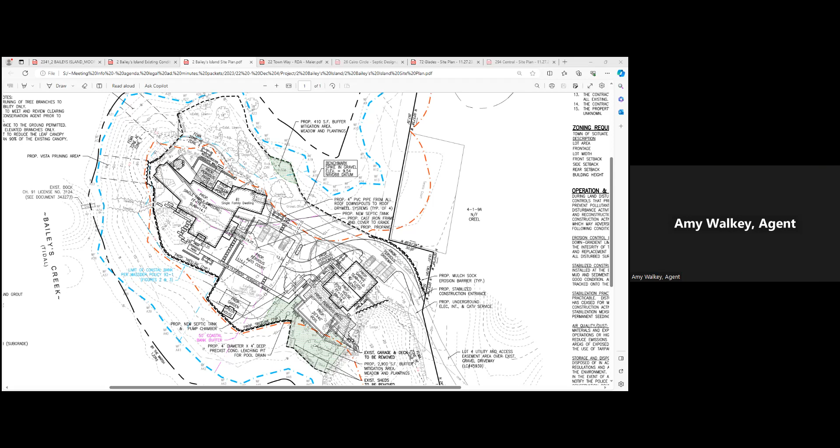29th? Okay. But it might be good to get the site visit done ASAP before snow hits the ground. Is it going to snow? Not this year. It's not Thursday. So yeah, that wouldn't be a bad idea. Let's try to do that before Christmas. Yes, maybe the week of the 11th. Sounds good. All right, we'll try to get a consensus from commission members, see who can go, and see if we can set it up for that week.

That sound good? And then we'll continue this to the 29th? Chairman Snow, the 29th is an awfully long way from now. Would it be possible to get on the prior meeting in January? If we're not prepared, we'll ask for a continuance. The earlier meeting is almost two months away, so the earlier meeting is the 8th.

What have we got on for the 8th, Jen? We already have six notices of intent for the 8th. New ones, not counting this one, Frank. That would be heavy with this.

I think we should stick with the 29th. There's just an awful lot of filings. Yeah.

Penny, if we promise to make the plan in an even nicer color, would that help? Yes, a little earlier. I'm not deciding. Well, somebody tell me what to do here. No, I mean, I get the point. Yeah, I do too, but it's just January's kind of a screwball month.

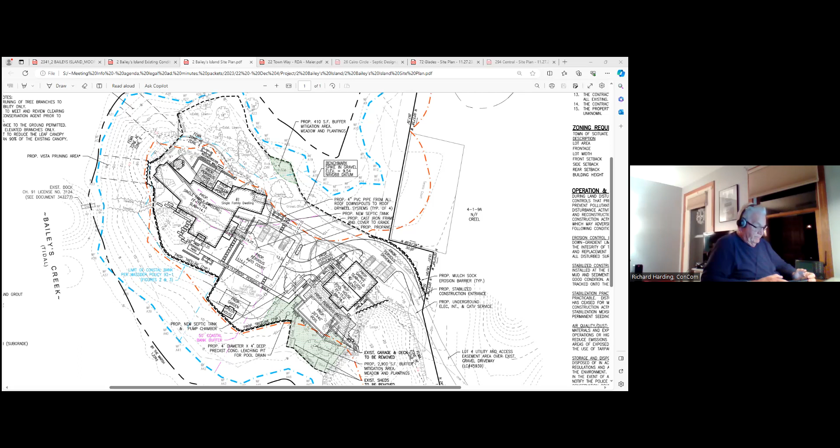Well, somebody make a decision here. I think we have to stay with the 29th. Frank, you're muted if you're talking. I was talking to Jen for a minute, just looking at the calendar, but she's showing me how much they already have on the 8th.

So we've got to go, that's too bad we're not meeting the 22nd, because that would have been perfect. Well, nothing's perfect. Adam, I'm just trying to think of other ways to expedite this a little bit. If we get things from the consultants, you'll have time to review those and get back and forth. Yes, it's our intention to resolve all of the outstanding peer review comments prior to the next hearing. Right.

And then we get a site visit. The only other proposal that I'd make is that we continue it to the 8th, with the agreement that if we're jammed, we'll ask that we continue it again to the 29th.

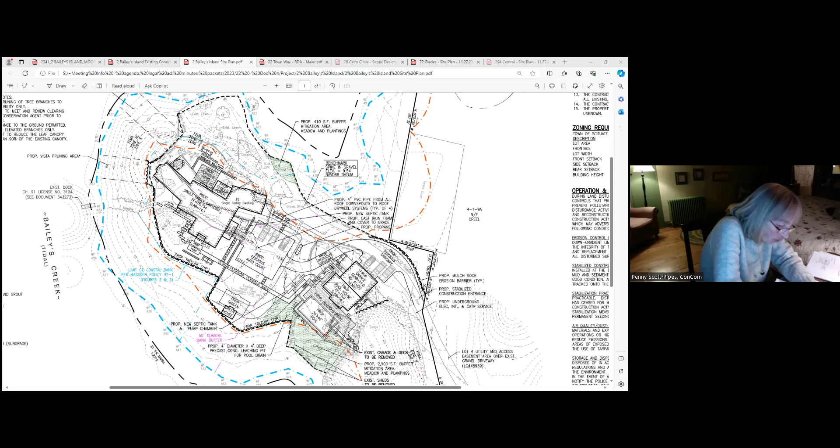That's one way. The other thing that could happen is if we decide we need some additional meeting with that, we could continue it to the 22nd or something. I don't know. That's certainly acceptable to the applicants.

I make a motion we tentatively continue - well, we're definitely going to continue it to the 8th. The thing is, you just said we might kick them out. We would have to open it regardless. All right, fine. I make a motion we continue to January 8th, to Bailey's Island.

Chairman Snow, Adam Brodsky - can we agree upon a date for the site visit before you continue us, please? We're going to get a consensus from commission members, and we're shooting for the week of the 11th, December 11th. So that's next week.

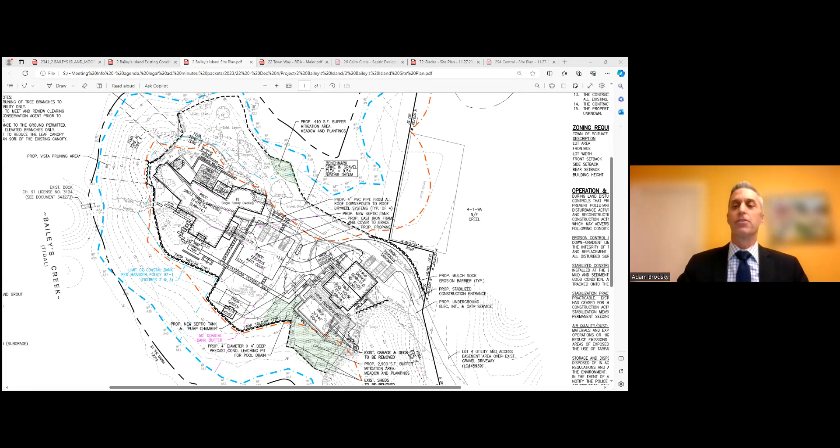Well, why don't we say we're going to try for either the week of the 11th or the 18th, and Jen can get out to members and we'll get a consensus and see if that jives with your schedules, Adam. Great, thank you, that's what I was getting. If you can give us several dates and times that work, because we've got a busy team. Sure, thank you.

Okay, so I have a motion from Penny. A second from Brendan. All in favor: Richard, yes. Doug, yes. And Frank, yes.

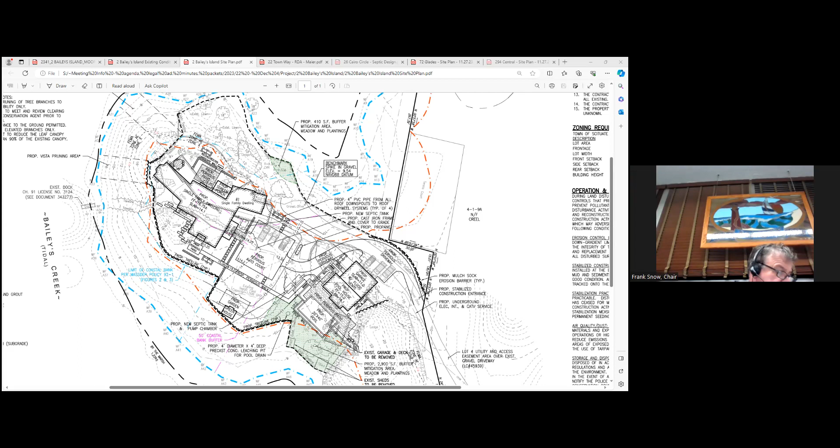294 Central Ave. This was continued from 10/23.

And we have someone from Morse, maybe. Jeff Hassett. All right, thank you again. Hey Jeff. Hello, so Jeff Hassett here again.

So yeah, as you noted, this was a continued public hearing for a notice of intent to elevate a house at 294 Central Ave in Humarock. Since the last meeting, the DEP file number has been issued. We submitted structural plans, which were done by Rivermoor Engineering, and the house is going to be removed from the concrete foundation and elevated up about 3.5 feet higher on timber piles.

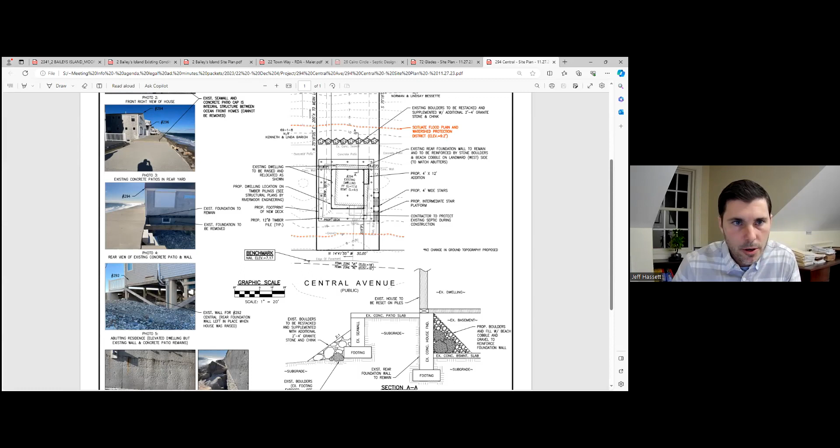And we also did additional research on the seawall, and we've provided some photos along the left-hand side of the page. If you can zoom in, we'll start with photos 1 and 2. They show the subject property in the middle, the gray house, and then the abutting properties on either side. And then if you scroll down to photo 3, it shows the existing seawall on the seaward side of the property with a concrete cap on top, and that's 294, the taller house in the middle of the photograph.

Going down to the next photograph, photograph number 4, that's again the subject property. You can see it's on a concrete foundation with a seawall with concrete on top of the seawall in front of it. So that seawall and that method of construction is consistent for the 8 properties in a row there. And we were looking into specifying that concrete foundation wall around the house be removed, but it's not feasible to remove the portion on the seaward side because it's basically part of that seawall. That seawall would collapse if you removed that front portion of the wall.

So what will happen is the house will be elevated. That portion of the wall will remain, but it will not hold up the house in any way. The house is going to be about a couple feet higher than that, and it will be totally held up by the timber piles.

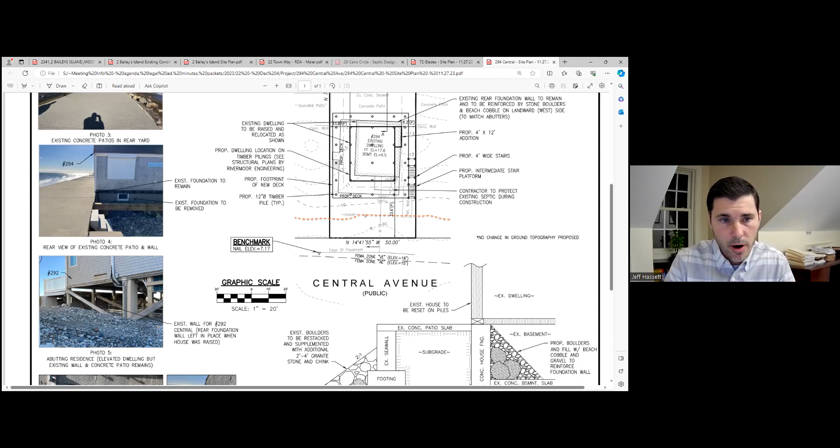Photo 5, the next one down, is the house immediately next door. If you're looking at the property from the street, it's the house to the right, and they were recently elevated in the same fashion. If you look closely at that seawall, that's the old foundation wall that remained holding up that seawall.

And then lastly, it was brought up by the property owner that on the seaward side of that seawall, the footing is beginning to show. Basically, the boulders have been pulled away from the wall, so we're specifying those boulders to be replaced and additional boulders to be supplemented in that area. We've called that out on the plan and also detailed it with the section view to the right of the photos. So we do feel that this project can be approved.

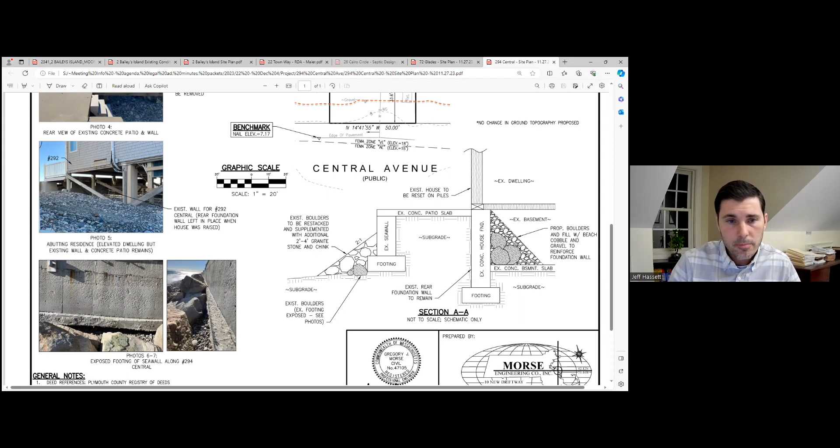Again, it's the same method of construction as the property immediately adjacent, and it should be a big improvement, as that house will now be elevated in accordance with current FEMA regulations. Thank you. Thanks, Jeff.

Amy? Yeah, so okay, this is our second time having this — it was continued. And this is our revised plan. They want to also fix the seawall too, as well as go up.

We didn't have DEP comments or a number before. Now we do have a number with comments that say it appears that retaining a portion of the existing foundation and adding boulders as proposed would not meet the performance standards for coastal dune 310 CMR 10.28 and barrier beach 310 CMR 10.29.

So we need to consider those comments while conditioning a project here. That's all I can say.

So I think that repair of the revetment as proposed, but not adding to or building out, would be okay. And elevating is going to be an improvement, but yeah, it's a tough spot.

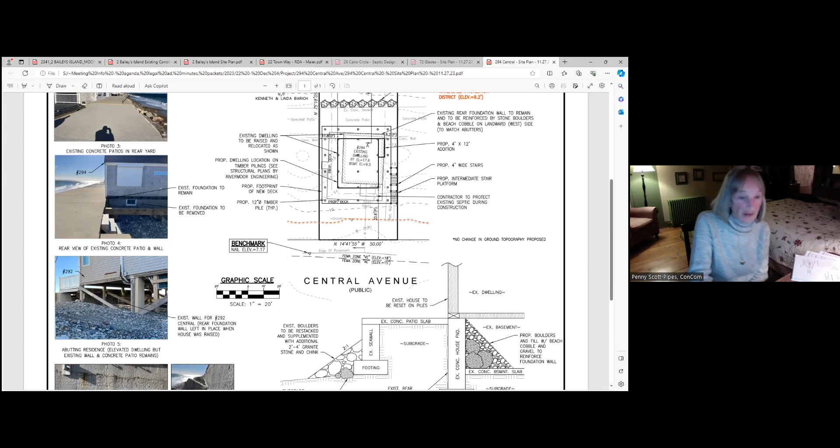I'm just wondering, so Amy said DEP said that doesn't conform - removing that wall and putting the boulders in there for reinforcement? Is it leaving the wall? Is it the boulders? I'm just trying to figure out what the alternative is.

So DEP did not see this version of the plan. The version that DEP reviewed was the first version that you guys reviewed, which showed that they were going to keep the walls - they were going to put the house on piles, but then keep walls inside the house. So the comments were that those walls should come down because walls are going to direct flows of storm water. So those walls are going to go, but now our wall, the seawall, the revetment structure, which actually does connect to other walls along the seawall that they're rolling into part of the project too, is significantly damaged and also needs to be repaired.

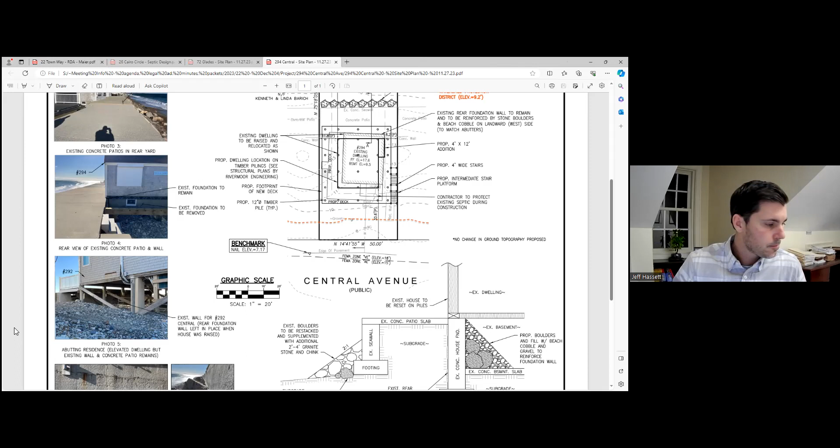I remember, Penny, Richard, way down the other end, we allowed someone to do something like that. It got into quite a situation - I don't even know if we still got it resolved, right? I was thinking of 2 or 3 situations. One way down south, almost to the Marshfield end, not quite that far, and then a couple others south of this particular location, but not far south, still north of the middle part, still on the north end.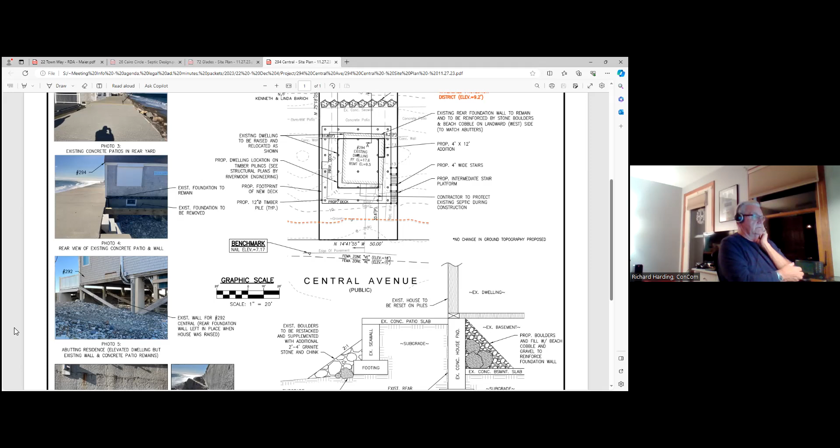Yeah, right. So Amy, can we condition this thing this way? What's your read on this? I think so. Okay.

All right, I don't have anything else. We asked for anybody in the audience, right? No.

So there was a motion - make a motion to close. I'll second it. Second by Richard, all in favor. Doug, yes. Brendan, yes. And Frank, yes. Great, thank you.

72 Glades Road. And who do we have?

This is Jeff again, yeah, I'm here again for this one. So what were we - we opened this, there was some discussion. Yeah, so it's a continued public hearing and we basically just continued it, waiting for Board of Health approval.

And also revised plan just for Board of Health approval, and also just to make sure any other clarifications were made to the size of the house. Okay, yeah, because we got that letter. Is this house bigger?

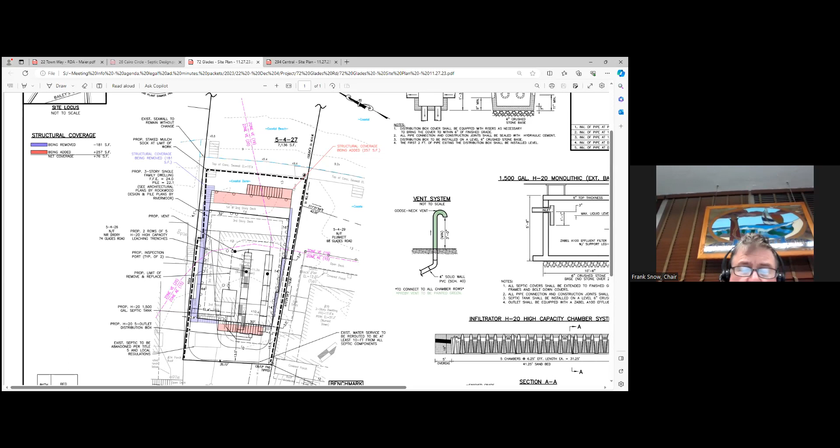I can't remember. No, but what we did is say that you can't come back and ask for more. So on the square footage of the houses you conditioned on these other houses, you're at your max. So we did scale back the size of the deck from the first hearing. That front deck now extends 8 feet from the face of the house, originally it was 15 feet. So we've scaled that back. We also pulled the septic closer to the road, getting it entirely out of the velocity zone. And we submitted structural drawings.

On this plan, the areas shown in blue are where the proposed house is smaller in footprint, and the red are where it's getting larger. So the deck is a little bit larger in front on the ocean side, but almost half the size of what we originally proposed. A lot of that area is a step. So then we have a table - it's a slight increase of about 76 square feet of coverage.

Okay. All right. Who wants to go first? Richard?

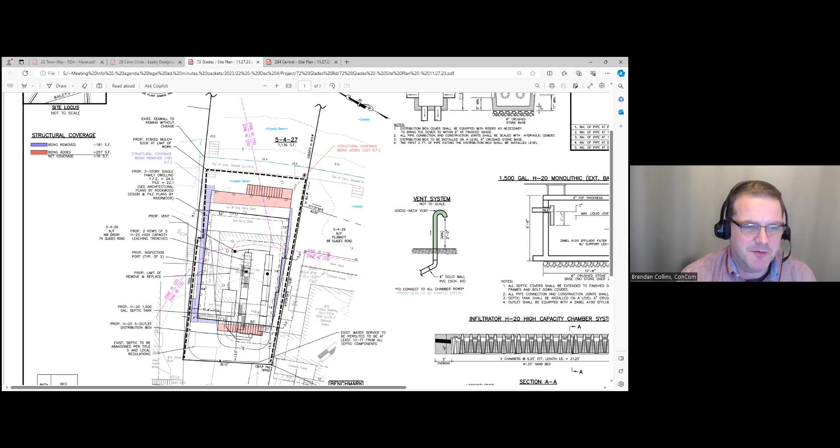Okay, so do we have anybody in the audience? Yes, you do. Jen. Please state your name and address.

Hi, yes, good evening, guys. Good evening. Nir Drory, 74 Glades Road. I'm the next door neighbor of 72. Good evening.

I'm hearing the conversation going around between everybody, and it seems like everybody forgot what I had to go through to get my approval. And I will remind everybody. We came in with the intent to enlarge the footprint, and it wasn't by a lot, maybe 7 or 8% of what we tried to build.

And we went through a really hard time, and everybody was opposing my project and enforced me to stay within the same footprint. We actually had to cut down 4% smaller than what the footprint was in one of the houses, and then on the other two houses, we were 2% smaller on the footprint.

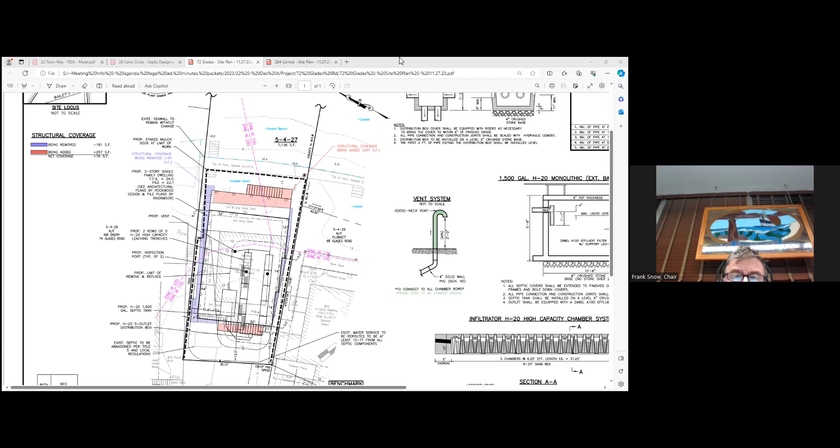I mean, I think regulation consistency is the key. What I just said to you was, it's hard for me to compare this because I don't have all those other things in front of me right this minute, and I know there were different circumstances. I understand what you're saying, and we can certainly get more information on this project.

I just don't see how you could allow somebody to go bigger while making me stay smaller.

Again, that's just not the way I'm remembering it. I'm looking at the old plans, all the houses did get bigger. Not substantially.

Lot coverage, we went 4% smaller. They did not get bigger, we went smaller. My lot coverage is 4% smaller than what it was, and the intent was to make you guys happy. So I went smaller than what I had, because nobody was happy with me trying to increase, and it wasn't by much. So we went smaller, all my lot coverage on all my houses are smaller than what they were.

If you look at the report that Greg Morse provided, and I have it in front of me: 74B was 1,288 square feet, we went down to 1,236 square feet on the lot coverage. It's a 4% reduction. On my 74 house, 2% reduction between 74 and 74C. So all of my houses, on the footprint, are smaller than what they were.

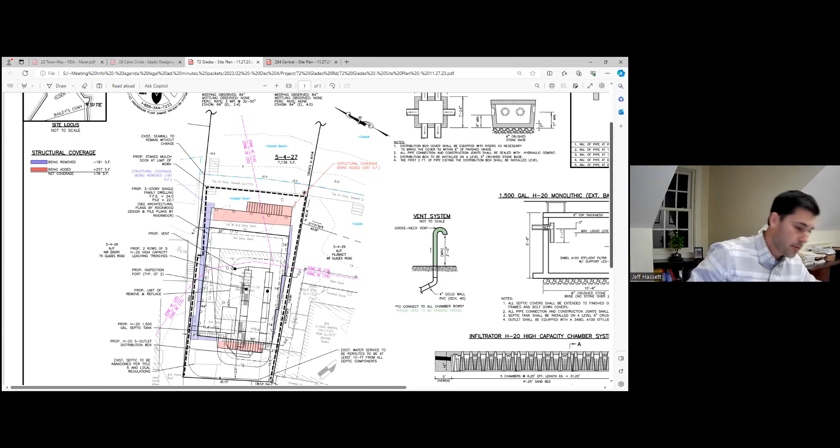So this house that we are proposing, it's only a footprint of 30 by 44, with a deck extending off the front an additional 8 feet instead of 15 feet. It is a slight reduction. We do have that structural coverage table on top. With that additional 76 square feet of coverage, to me it's somewhat de minimis, and it's not going to have any adverse impact on the ability of the coastal dune to function. And the house will be elevated higher than the existing house in FEMA compliance.

What's the increase in square footage, the percentage increase, Jeff? I only have it as the square footage increase of 76 square feet. I don't actually know the existing and proposed total square footages. So you're saying that this house is increasing 76 square feet of structure coverage?

Yeah, so the lot coverage area that's being eliminated from structure coverage is subtracting 181 square feet. And that area shown, I mean, this is where it gets to be a little bit of smoke and mirrors with some of the others as well, like what's a deck, what's not.

And I wasn't prepared to address all of these tonight. So you're saying lot coverage from what existed before to what's there, what you're proposing is an addition of 76 square feet. That's correct. And we have a compliant septic system that's now placed on the property. Correct. It's approved by ZBA, it's approved by Board of Health.

Did we allow roofs to be placed on those other properties, on the nearest property? Do we have roofs over those decks, or do we say no to the roofs? I'm not aware, I wasn't involved in those projects. Yes, you did allow roofs. Covered porches, yeah. And then what we said is they can't be further enclosed. Correct.

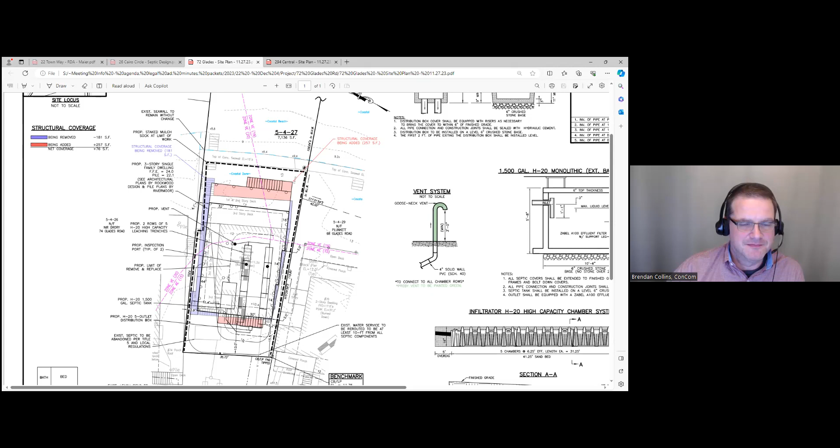But while I think it's nice to duly note that, we need to really focus on the interest of the act here and move this along, if we can.

Does anybody else from the commission have anything they want to add? Nir, do you want to speak again? Do you want to unmute him, if it's something of relevance that hasn't already been brought up previously. I think you're unmuted. All right, thank you.

Nir, only if you haven't already said this. I understand. I mean, like I said, the only thing I think it's very important is regulation consistency. I think everybody should follow the same type of rules. That's all I have to say. Thank you.

I do think that all of these hearings try to accommodate folks as best we can and work with the circumstances of each property. I think Brendan's points are well made, that all of these properties have expanded. We could do all kinds of calculations to see which one expanded in which direction.

I think the only thing that came up on this that concerns me, Jeff, was: were those stairs at the rear of the property always in that location, the previous application? No, and it would not affect the ZBA applications, because the setback is measured to the structure, not the steps.

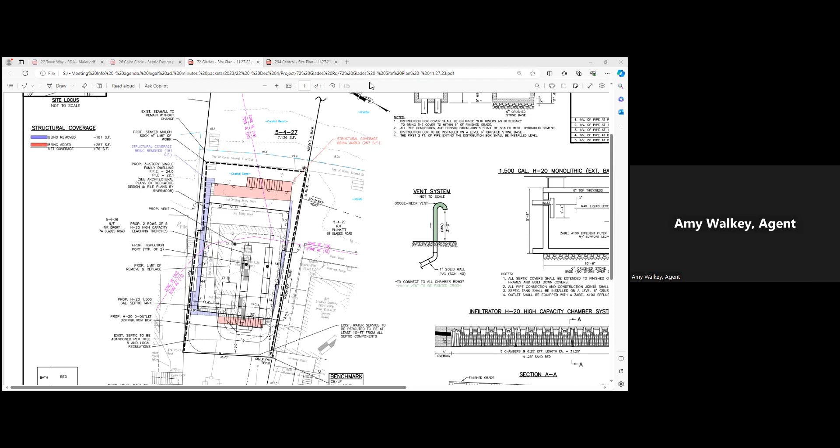All right, well, Jeff, these houses in the velocity zone on the beach and coastal dune are conditioned with no lattice. Okay, that's the way we've been conditioning these houses. That's good to know. It's just garbage on the beach.

Anything else? No. I have a motion, I make a motion to close. I'll have a second. I'll second that, that was Doug. Yes. All in favor: Richard, yes. Brendan, yes, and Frank, yes. Okay, thank you. All right, thanks everyone.

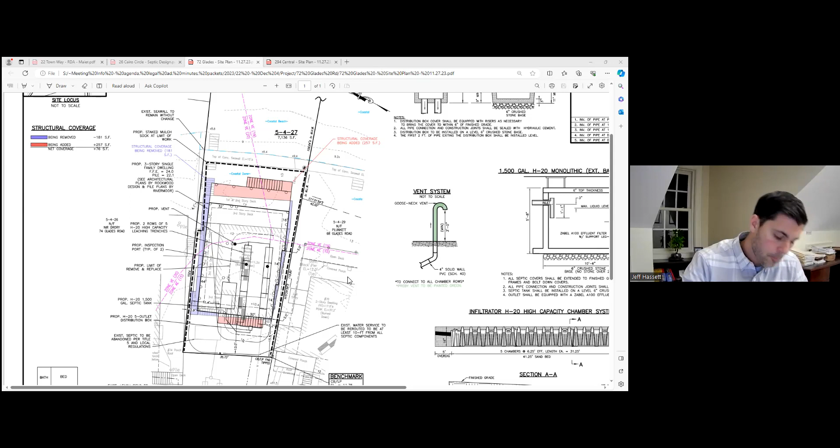Thank you. Let's see, 26 Carol Circle. On, Frank? Yes, I'm sorry, I just realized the time. I think we got enough people to vote. Okay, I got another 20 minutes. Didn't want to get too deep. Well, that's a good incentive, Brendan. Yes, well, to be thorough, I got a clock right in front of me, and I've been watching it for the last hour.

On December 4th, 2023, during the 6 p.m. meeting, the Scituate Conservation Commission will act on the request of Megan and Robert Quinn for a determination of applicability of the Massachusetts Wetlands Protection Act and the Scituate Wetlands bylaws for activities related to septic repair at a single-family dwelling at location 26 Carol Circle, Scituate, Mass. Abutters and other interested parties are invited to attend. Information to access the meeting will be available on the agenda posted on the town website.

And we have someone from Morse Engineering.

All right, thank you, Greg. How'd you get all the late night ones, Joe? Greg doesn't have the night off, don't worry. Just double book tonight.

So this is a filing for a septic repair at 26 Carol Circle. The property owners are Megan and Robert Quinn, and this property is about 29,000 square feet in size. It's developed with a 4-bedroom single-family home, and it has a failed septic system. We have the wetlands flagged. They are off-site, and it's a BVW flagged by John Zimmer in November. The wetland is in blue, the 50-foot buffer is in red, and the 100-foot buffer is in green.

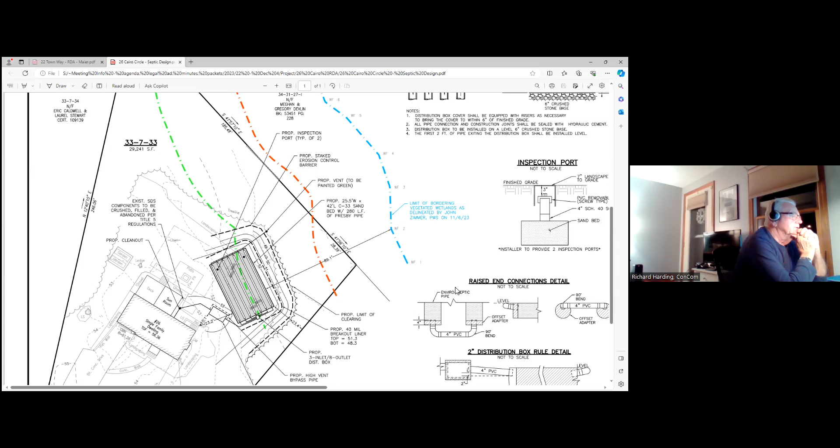Doug? No problem at all. Penny? Good with it, all good. Brendan? I have no additional questions. Amy? It appears to meet the requirements of a negative finding, and we would also comment that we would not accept these resource areas as part of a notice of intent. We would typically confirm these under a notice if it was a raised rebuild, but for this project, it's great.

Thank you. Not that I want to be here all night, but Jeff, why wouldn't they have put that field over in the other corner of the backyard, where it would be a little bit further away? The grade is slightly higher over there, so it would result in the field being a foot or so, 1.5 feet taller, and that'd be enough that it would have to be a pump system and a pronounced mound. Got it. Okay, and I would rather have a gravity system over a pumped one, it just eliminates all that maintenance and other things.

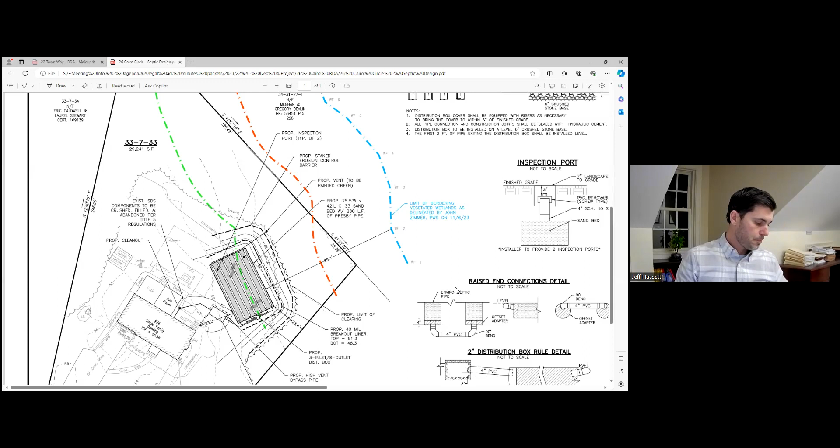Anybody in the audience? Seeing none. Penny, I make a motion for -3.

Second, from Richard. All in favor? Doug, yes. Brendan, yes. And Frank, yes.

During the 6 p.m. meeting, the Scituate Conservation Commission will act on the request of Robert and Margaret Maier for determination of applicability of the Massachusetts Wetlands Protection Act and the Scituate Wetlands bylaws for activity related to expanding an existing deck at a single-family dwelling located at 22 Town Way, Scituate, Mass. Abutters and other interested parties are invited to attend. Information to access the meeting will be available on the agenda posted on the website.

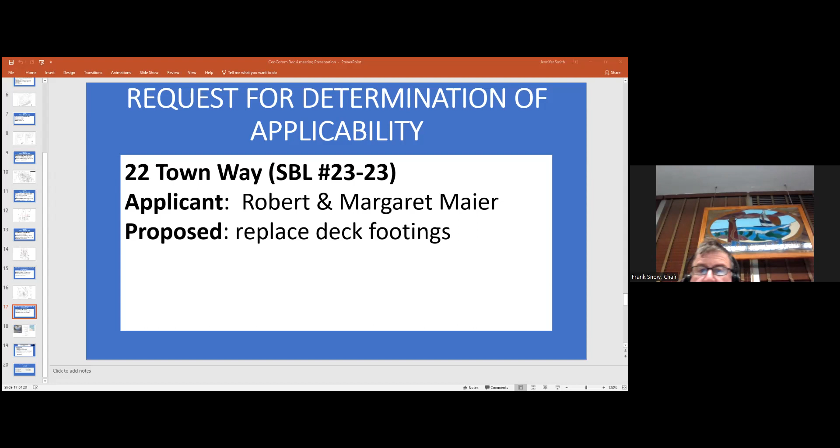We have a plan or anything? It says only replace deck footings. Yeah, and Mr. Maier is on the call. Yes, can the commission members hear me? Yes, we can. Good, perfect.

Good evening. Listen, being mindful of your time, I will give you a 1-minute project overview. I'm the owner of 22 Town Way, and we've submitted an application for essentially 2 deck footings that would be in association with a proposed deck expansion project at 22 Town Way. The property is located in an AE flood zone. There are no other resource areas that would be impacted or involved.

The land is subject to coastal storm flowage. The proposed installation of 2 footings, which you can see on the marked up set plans that we have, would be entirely within the confines of an existing gravel driveway. The footings are envisioned to be precast pier footings sourced locally from Scituate Precast. I want to emphasize that the proposed footing work will not change the drainage or water flowage to our property or adjacent properties, and there really won't be any impact to vegetation or wildlife. That's the overview, so I'll take any questions if there are any to be fielded.

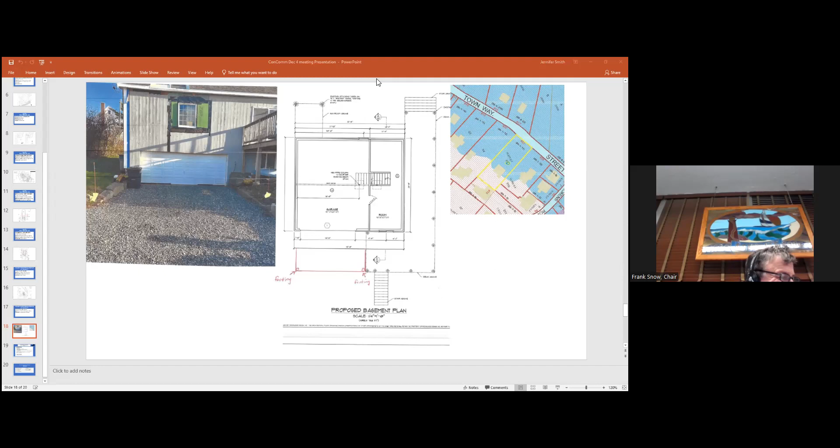Wow, how'd we do, Brendan, so far? Doing great. All right, let's move on, Amy. Short and sweet.

Okay, you had 5 minutes left, we can do this. What do we got left? Well, we got the minutes.

I make a motion we accept the minutes of October 2nd and 23rd as written. Second. Second from Penny, from Doug. All in favor? Richard, yes. Brendan, yes. Frank, yes.

Thank you, Penny. I can't do the orders because I wasn't here when you did Westgate. Okay, one of you guys want to make a motion to accept the orders? I make a motion to accept the orders for 8 Westgate as written.

It's a motion by Richard, a second by Brendan. All in favor? Doug, yes. Frank, yes, hoping I was there.

Okay, we have an extension request for 281 Old Oaken Bucket Road. Right, so that's related to the actual 40B. How much time do they want, Amy?

Well, typically under the first extension you'd give them 3 years. They didn't request a particular time, but we'll give them 3, probably would be the first time, and then you can talk about it next time.

Okay, I make a motion we extend an extension to 281 Old Oaken Bucket Road for 3 years on their orders. Second, that's a motion with a second from Richard. All in favor? Doug, yes. Brendan, yes. Frank, yes.